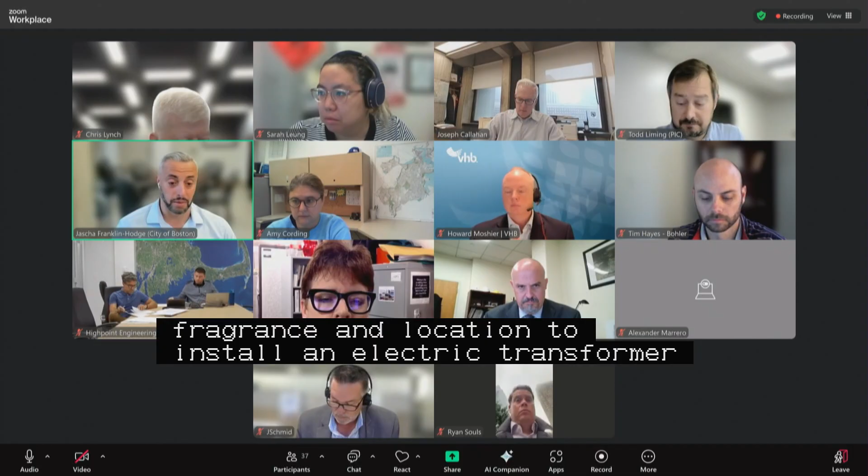On to our next agenda item, public hearing continued number 1 on a petition by NStar Electric Company, DBA Eversource Energy, for a granted location to install an electric transformer vault and associated infrastructure within Whitby Street, Public Way, East Boston, located at address number 16, generally northwest of Ford Street. It was new business on August 14th and had public hearings on August 28th and September 11th, as shown on a plan entitled City of Boston Public Works Department Engineering Division Granted Location Plan of Transformer MH4PIC, 16 Whitby Street, East Boston, one sheet dated August 2025. The proponents please introduce themselves, their affiliations, and let us know how you intend to proceed today.

Hi, good morning. It's Katie Flaherty from Eversource Electric. Just wanted to give you an update. We're still talking between Chong and our legal department on the documents that you had requested, and the Mylar plans that we have to submit still do need some additional corrections. So we are going to ask this morning for another continuance, but we are actively working on the documents that you are asking us to submit.

All right, well, appreciate that work. Katie, is 2 weeks appropriate? Yes, it would be. Okay. Do I hear a motion to continue public hearing continued number 1 until October 9th? I'll make a motion to continue public hearing continued item number 1, as read into the record by the chair, till October 9th. Second. All in favor? Aye. Aye. Aye. Any opposed or abstain? So moved. We'll see you back here then. Thank you. Thank you very much.

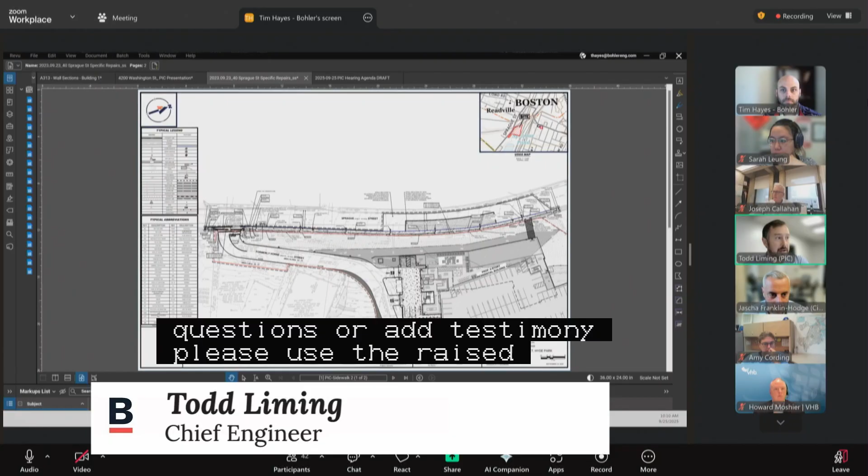Hearing none. PIC staff or members of the public? I will take this opportunity to remind the public, if you wish to ask questions or add testimony, please use the raised hand function, which can be found at the reactions tab at the bottom of your screen. I do not have any comments at this time, and I'm not seeing any raised hands, so I think we're all set.

Do I hear a motion to approve public hearing continued number 2? I'll make a motion to approve a petition by LHCD Sprague Owner LLC for the making of specific repairs within Sprague Street as read into the record by the chair. Second. All in favor? Aye. Aye. Any opposed or abstain? So moved. Thank you so much.

All right, on to the public hearing section of our agenda, starting with public hearing number 1 on a joint petition by GUGV2 212 Stuart Property Owning LLC and the Boston Redevelopment Authority, DBA, the City of Boston Planning Department, for the discontinuance of any and all rights to travel the public may have had within segments of Stuart Street, Public Way, Boston proper, located on its southerly side at address number 212 east of Church Street. This was new business on August 14th, as shown on a plan entitled City of Boston Public Works Department Engineering Division Discontinuance Plan, Stuart Street, 212 Stuart Street, Boston proper, one sheet dated July 9th, 2025, revised August 29th, 2025. Would the proponents please introduce themselves, their affiliations, and give us any updates since your new business hearing?

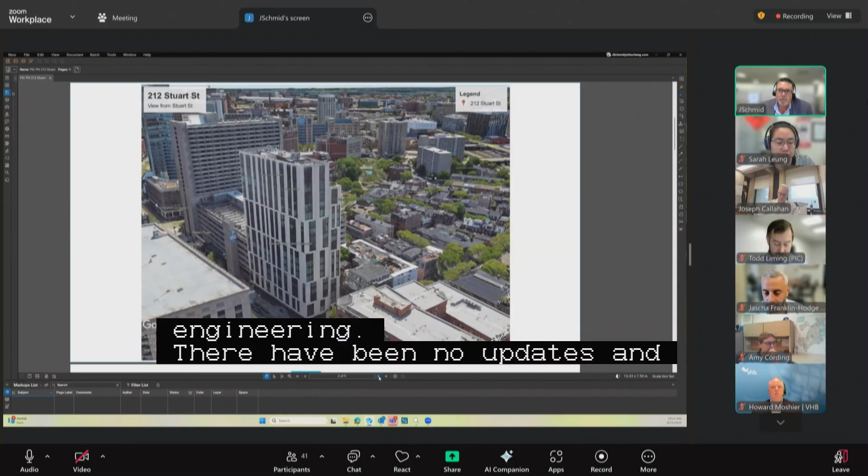Good morning, this is John Schmid with Nitsch Engineering. There have been no updates since new business. This is really a housekeeping exercise. This project was permitted through the Public Improvement Commission in 2019 and constructed with completion in 2022. Post-construction surveys had identified a couple areas that the building had grown outside of the discontinuances and takings that were approved back in 2019. So there has been an appraisal report that's been submitted and accepted by the city.

And these discontinuances have upset limits, basically from the sidewalk to the limit that is required. The application, the one before you, the discontinuance would start at the sidewalk and extend about 42 feet up, which is about 4 stories. The total square footage is about 43 square feet, and it runs along the front of the building here. At new business, there was a question about the clearances of the sidewalks, and the clearance on the sidewalks is still in excess of 8 feet. And I had reviewed this with Sarah post the new business hearing. I'm open to any questions.

Commissioners. Hearing none, PIC staff or members of the public? John, could you just, for the record, mention the difference between this action and the next action as far as the fee interest in the right-of-way? I'll defer to Gregory on that because I'm not totally clear on those differences between the two actions.

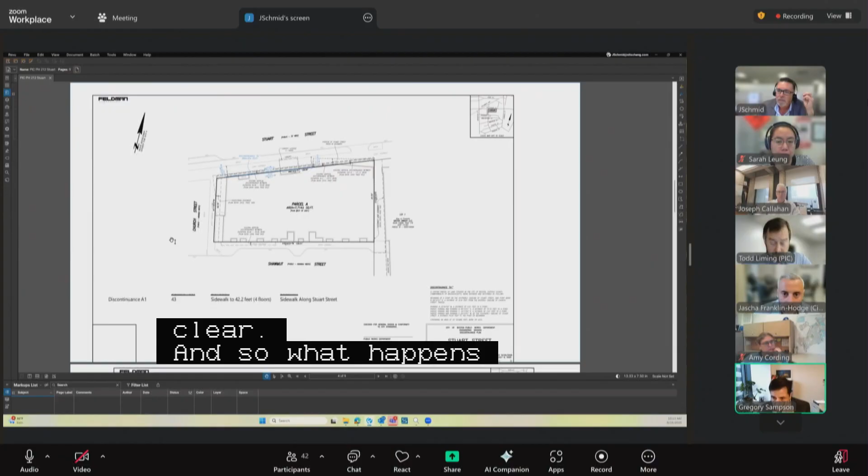Good morning, Greg Sampson with Sullivan & Worcester. There was a portion of the Stuart Street where the fee interest was with the City of Boston. The Boston Planning Department approved the taking for that interest last week. So public hearing 1 addresses the portion of the discontinuance that was subject to the taking. We'll talk, public hearing 2 will address the remaining portion as well as a portion of discontinuance on Shawmut Street. Perfect. Thank you, Greg. Thank you.

All right, hearing no other comments or questions, do I hear a motion to approve public hearing number 1? Make a motion to approve a joint petition by GUGV2 212 Stuart Property Owner LLC and the Boston Redevelopment Authority, DBA, the City of Boston Planning Department for a discontinuance in Stuart Street as read into the record by the chair. Second. All in favor? Aye. Aye. Any opposed or abstain? So moved.

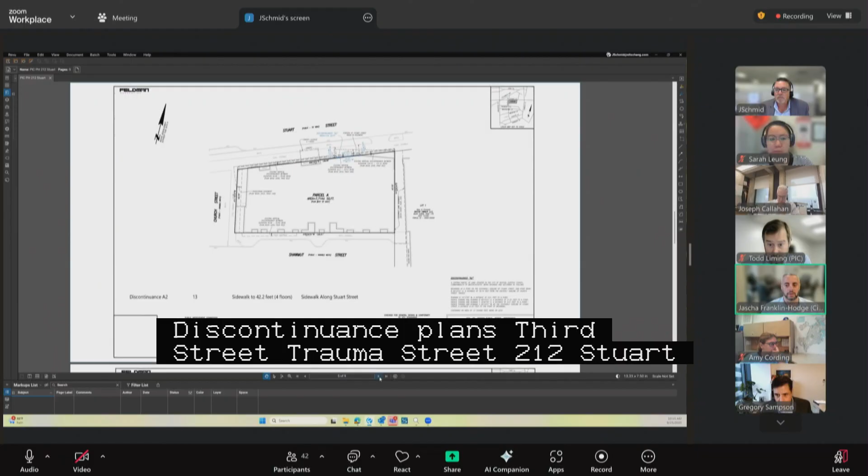On to public hearing number 2 on a set of petitions by GUGV2 212 Stuart Property Owning LLC for the discontinuance of any and all rights to travel the public may have had within segments of the following public ways in Boston proper: Stuart Street on its southerly side at address number 212, generally east of Church Street; Shawmut Street on its northerly side, generally between Church Street and Coconut Grove Lane. New business on August 14th, as shown on a set of plans entitled City of Boston Public Works Department Engineering Division Discontinuance Plan, Stuart Street, Shawmut Street, 212 Stuart Street, Boston proper, 2 sheets dated July 9th, 2025, revised August 29th, 2025. The proponents please reintroduce themselves and their affiliations and let us know if there have been any changes to these plans since your new business hearing.

Good morning, John Schmid with Nitsch Engineering. There have been no changes since new business. This is the section along Stuart Street that's about 21 feet long, consists of 13 square feet, and it's only about 4 stories high, and that's the upset limit for the discontinuance. And we're maintaining the appropriate sidewalk that's greater than 8 feet. All right.

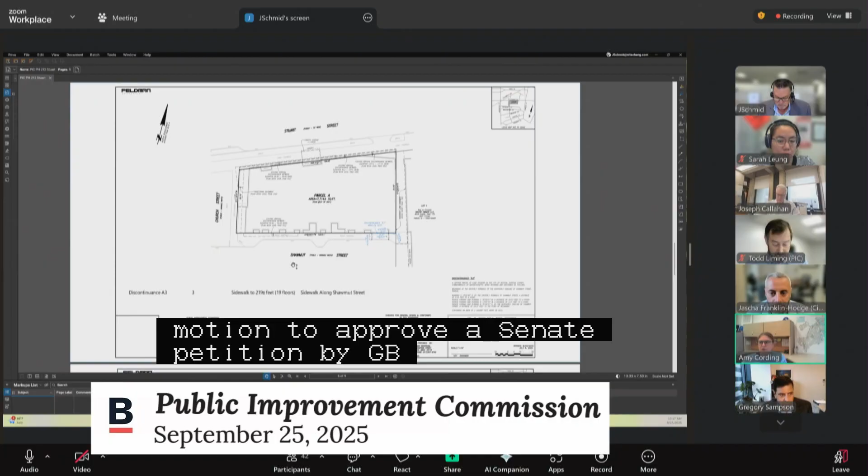Do I hear a motion to approve public hearing number 2? I'll make a motion to approve a set of petitions by GUGV2 212 Stuart Property Owner LLC for discontinuance in Stuart Street and Shawmut Street as read in the record by the chair. Second. All in favor? Aye. Any opposed or abstain?

So moved. On to our third item, public hearing number 3, on a set of petitions by GUGV2 212 Stuart Property Owning LLC for the granting of projection licenses for the installation of balcony railings and a canopy over portions of the sidewalks within the following public ways in Boston proper: Stuart Street on its southerly side at address number 212, generally east of Church Street; Shawmut Street on its northerly side, generally between Church Street and Coconut Grove Lane. This was new business on August 14th, as shown on 2 plans entitled City of Boston Public Works Department Engineering Division Railing License Plan, Shawmut Street, 212 Stuart Street, Boston proper, 1 sheet dated July 9th, 2025, revised August 29th, 2025, as well as City of Boston Public Works Department Engineering Division Canopy License, Stuart Street, 212 Stuart Street, Public Way, Boston, 1 sheet dated July 9th, 2025.

Would the proponents please reintroduce themselves, their affiliations, and let us know if there have been any changes since your new business hearing. Good morning, John Schmid with Nitsch Engineering. There have been no changes since new business. This is a series of 8 locations along Shawmut Street where the architectural railings project further into the public way than was intended. The projection is 2.4 inches into the public way, and they're all identified on this drawing.

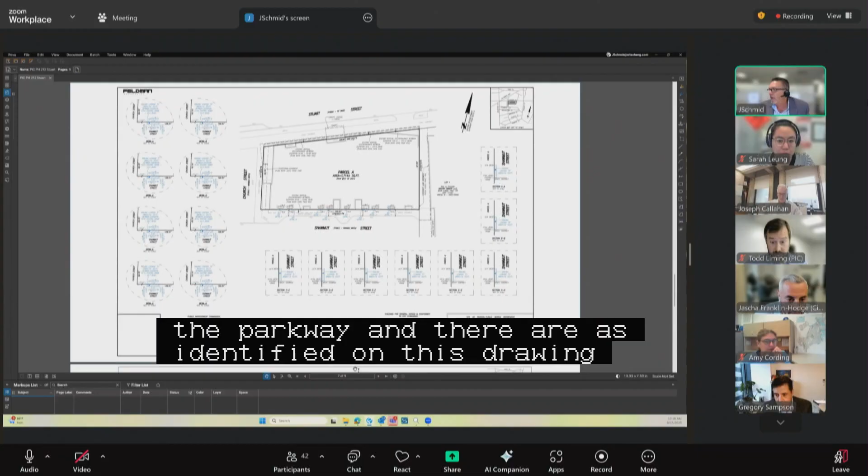Commissioners, and then the second component? Second page, yep. Second component has to do with the canopy on Stuart Street, which in 2019 was permitted with the commission for 134 square feet. It was constructed at 150 square feet, so we're coming in to just confirm that this is acceptable. We have 13.1 feet of clearance at the building, and it's 14.7 feet of clearance further out at the limit of this projection.

Any questions, Commissioners? PIC staff or members of the public? All set on these. All right. Do I hear a motion to approve public hearing number 3?

I'll make a motion to approve a set of petitions by GUGV2 212 Stuart Property Owning LLC for the granting of projection license in Stuart Street and Shawmut Street as written in the record by the chair. Second. All in favor? Aye. Any opposed? Thank you very much. Abstained? So moved. You are all set.

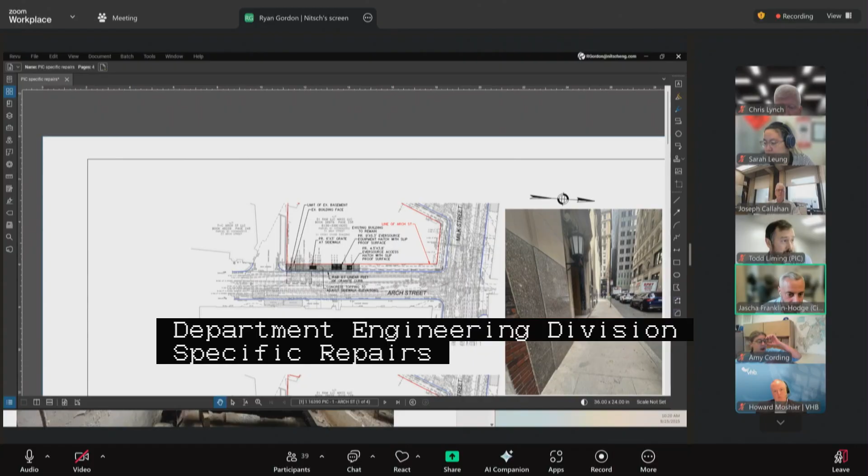Would the proponents please introduce themselves, their affiliations, and give us an update on the topics discussed at your new business hearing. Good morning, Mr. Chair and members of the commission. My name is Scott Oran, I'm manager of Dinosaur Milk LLC. I'm also treasurer of the 31 Milk Street Condominium Association, which is the licensee under an areaway agreement dated October 31st, 2012. I have Ryan Gordon from Nitsch Engineering here to explain what's been changed since we last saw you. Go ahead, Ryan. Good morning, Ryan Gordon, Nitsch Engineering.

Since the new business hearing, we have had an update to the extent of the sidewalk repairs along Arch Street, where we previously had about 97 feet. The locations of the Eversource hatches, we have an equipment hatch, a personnel hatch, and a grate in the sidewalk. Those have shifted south along Arch Street, so that's reduced the length to about 67 feet.

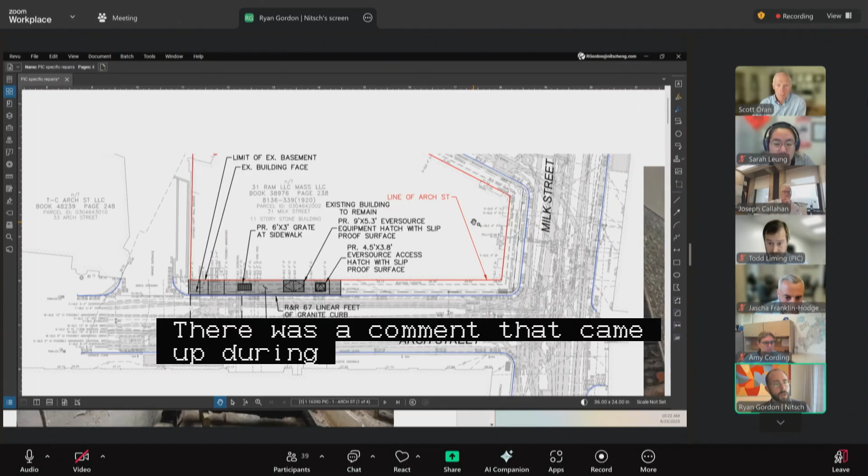And then along with that, there was a comment that came up during new business asking about the accessibility for the existing crossings on Milk Street at the intersections of Arch Street and Hawley Street.

At the intersection of Hawley Street and Milk Street, there appears to be a 2-inch lip on the curb that is not a great condition for pedestrians crossing the street. So as part of that, we would be looking to add an asphalt patch in front of this area to reduce that lip, which seems like something we can easily do to improve that accessibility onto the sidewalk.

There was also a comment about the structural integrity of the areaways around the building, because they do surround the building on Hawley, Milk, and Arch Street. Since then, cores have been performed for the slab of the areaway that have shown it's in good condition. There's an existing areaway agreement in place from 2012 that requires the owner to maintain the areaways in good condition, and those cores show that's the case, and they'll continue to do that as this project progresses.

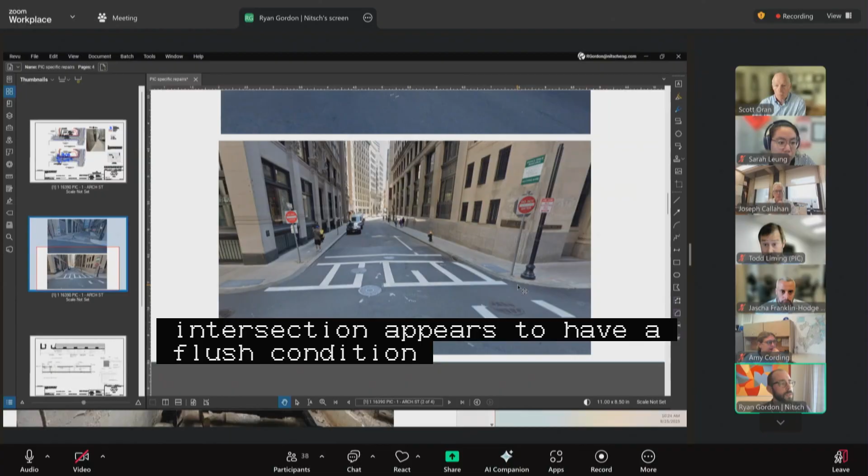And one other area on the other side, at Milk Street and Arch Street, this area at this intersection was recently repaved as part of the Milk Street bike lane project, and this crossing appears to have a flush condition. So that's something we've taken a look at to make sure that if there was any opportunity to improve accessibility, there does appear to be a flush condition already. Overall, the proponent is willing to work with the city to address any accessibility upgrades considered for the future here, and we're happy to answer any questions.

Great, thank you very much for those updates. On the accessibility front, I appreciate the additional analysis done on the existing areaway and the commitment to make changes to improve accessibility here, understanding that they will not result in fully ADA compliant ramps and sidewalks, but that there are things that can be done to make this a more traversable area for people who have mobility aids or otherwise can't navigate the existing conditions safely.

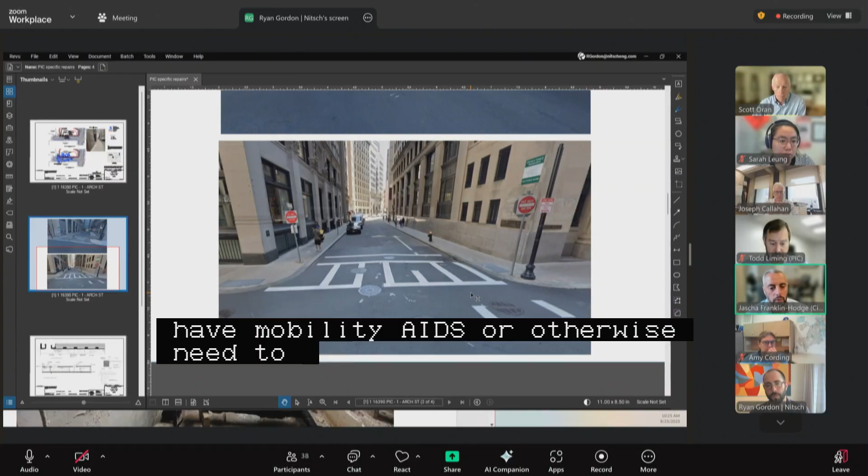With the areaway, at some point the city will need to come through to bring these intersections into full ADA compliance and construct proper ADA compliant ramps to the best of our ability. At that time, we will need both—at this point that's not scheduled work, but at that time we will need to likely reaffirm that the areaways are still structurally stable, if that is several years out from now.

And also we'll need some support from the building during the construction process to make sure that any work we are doing does not interfere with the stability of the areaways, and if there's waterproofing or other elements that might be disrupted by our construction, we'll need that sort of engineering level coordination. So I understand there is an existing license for the areaways, which likely obligates some of this cooperation, but I am hoping that the proponents for this project, understanding there's a condo relationship here, can affirm their intention to be supportive participants in any future reconstruction work, to the extent that you are, as a legal entity, still engaged in this project. We can, yes. Okay, all right, I appreciate that.

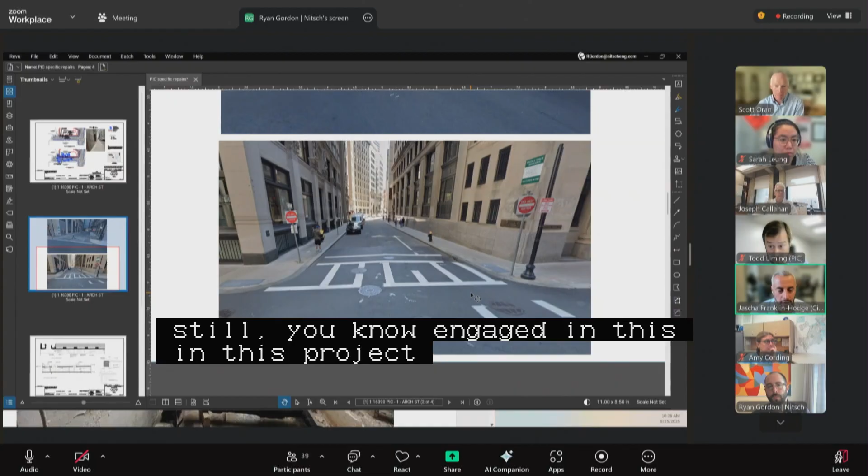And then in terms of the shorter term, smaller, not ADA, but still improved changes you are proposing to make, my request is that you sit with the Disabilities Commission to affirm that those changes are in fact what they would recommend, short of producing a fully compliant ramp here, and to see if there are any other similarly low construction or construction-light approaches that could be added here. One of the things we've used in a few places in the city are adhesive tactiles that attach to an existing surface but provide some detectability for people with visual impairments who are navigating the sidewalk. So there may be some other similar things like that, and even just looking at the intended asphalt treatment, we want to get their input on that. So we'd like to have that commitment from you to work with them on any of those smaller term improvements that are outside the scope of what the PIC is formally reviewing today.

Sure, absolutely. All right, appreciate that. Commissioners, other questions, comments?

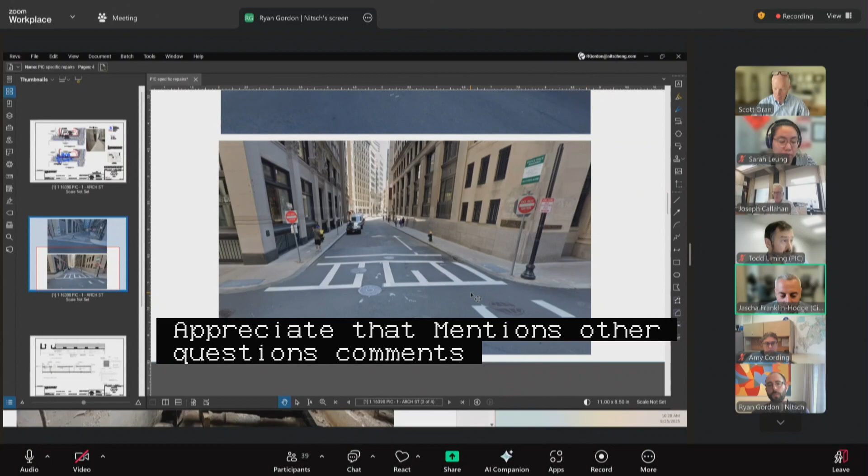Hearing none from PIC staff or members of the public, the chair confirms everyone is set on this item.

A motion was made to approve the petition by Dinosaur Milk LLC for specific repairs within Arch Street, contingent upon acceptance of revisions by the Commission for Persons with Disabilities. The motion was seconded, all were in favor, none opposed or abstained, and it was so moved.

The final public hearing concerns a petition by Verizon New England Incorporated for a grant of location with lead company status and no participants, to install new telecommunication infrastructure with city shadow conduit in Dorchester: Bird Street between Columbia Road and Cedar Place/Monadnock Street, Columbia Road at Bird Street, and Cedar Place west of Bird Street/Monadnock Street. This was new business on September 11th, shown on a plan entitled City of Boston Public Works Department Engineering Division Grant of Location Plan, Verizon, Bird Street at Columbia Road, proposed conduit installation, one sheet dated September 2025.

The proponents were asked to introduce themselves and provide updates since the new business hearing. Alexander Leslie Marrero introduced himself, noting he works with Pike Telecom, an authorized Verizon contractor, presenting the petition. He stated there have been no changes since the petition was brought as new business before the commission.

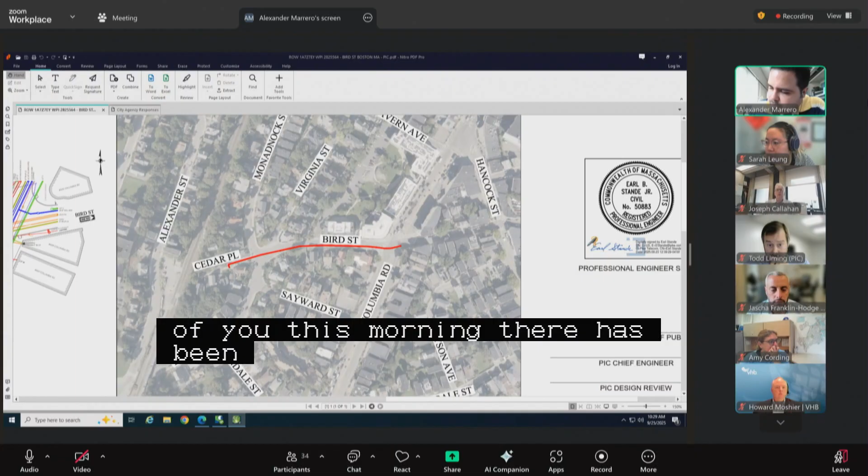As a recap, Verizon is petitioning to place one new 4-inch conduit and one new 4-inch city shadow duct from existing manhole number 11/280 at the intersection of Columbia Road and Bird Street, running westerly down Bird Street toward Cedar Place and onto Cedar Place, terminating at pole 849/1. This is to provide service to a small cell site located on Cedar Place.

The chair thanked the presenter and asked commissioners if they had any questions. Hearing none, the chair asked PIC staff or members of the public, who confirmed all set.

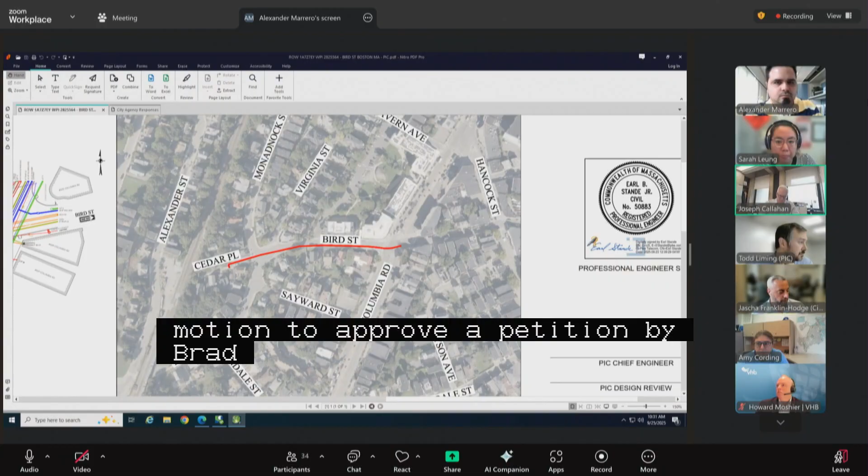A motion was made to approve the petition by Verizon New England, Inc. for a grant of location in Bird Street, Columbia Road, and Cedar Place, as read into the record by the chair. The motion was seconded, all were in favor, none opposed or abstained, and it was so moved.

This concludes the public hearing section of the agenda, moving to new business, starting with item 1: Pilgrim Road at 334 Riverway, 415 to 435 and 440 Brookline Avenue, Joslin Place, Roxbury pedestrian easement, specific repairs, and vertical discontinuances on a set of joint petitions by Beth Israel Deaconess Medical Center Incorporated, Dana-Farber Cancer Institute Incorporated, and Joslin Diabetes Center Incorporated.

The proponents were asked to introduce themselves and walk through the project. Howard Moshier of VHB in Boston, Director of Land Engineering, introduced himself along with Jarrod Dore, Vice President at Beth Israel Lahey Health, and Michael Hinchcliffe, Principal at Payette, Architect of Record. They presented an overview of the Future Cancer Hospital project and the proposed actions they are seeking approval for in a subsequent public hearing, then turned it over to Jarrod Dore.

Jarrod Dore, Vice President of Capital Facilities and Engineering for BILH, thanked the commissioners and provided background on the project: a bold vision for the future of cancer care in the area. In fall 2023, Dana-Farber Cancer Institute and Beth Israel Deaconess Medical Center forged a new collaboration to advance adult cancer care, announcing plans to build the region's only freestanding cancer hospital. The collaboration aims to improve access and transform patient care as cancer incidence increases and care models rapidly evolve.

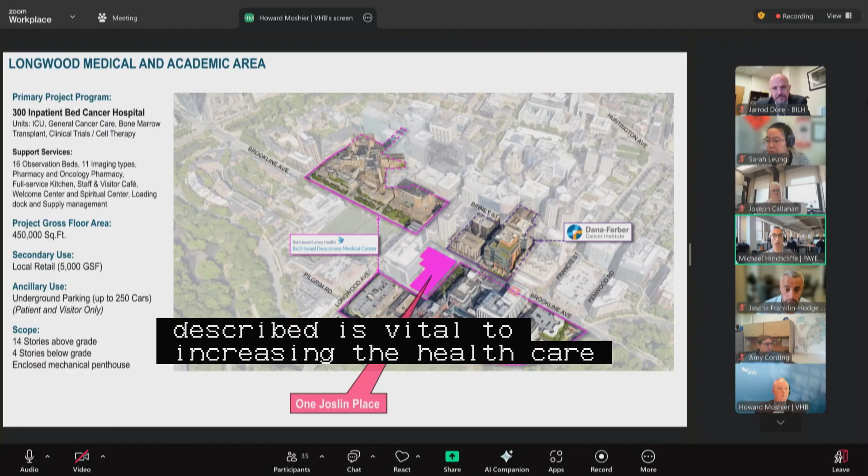As noticed in 2023, the project was introduced through a joint update of the institutional master plans for both institutions, reviewed and approved by the Boston Planning and Development Agency. In June of this year, the project that was the outcome of both of those institutional master plans was also approved. That is a 300-bed hospital dedicated exclusively to cancer care.

In this aerial view here, you see the context. It's at a location currently housing the Joslin Diabetes Center between both campuses, the Beth Israel Deaconess Medical Center East and West campuses in the Longwood Medical and Academic Area, and the Dana-Farber Cancer Institute campus just adjacent across Brookline Avenue. The project will house 300 beds operated and licensed by Dana-Farber Cancer Institute, dedicated exclusively to cancer care.

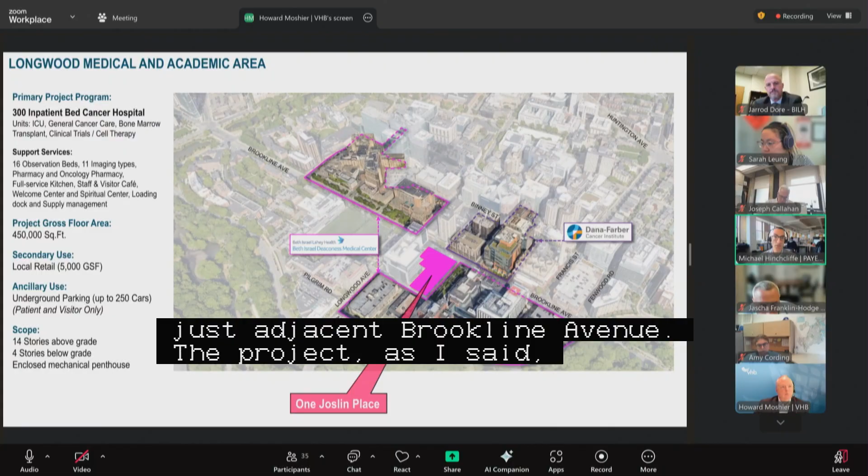The building will also house additional departments and functions that will support this freestanding cancer hospital, including patient amenities, kitchens, support areas, diagnostic imaging and treatment spaces, as well as an underground parking facility serving patients and their visitors. The building will be 450,000 square feet with approximately 14 stories above grade and 4 stories below grade for that valet parking garage.

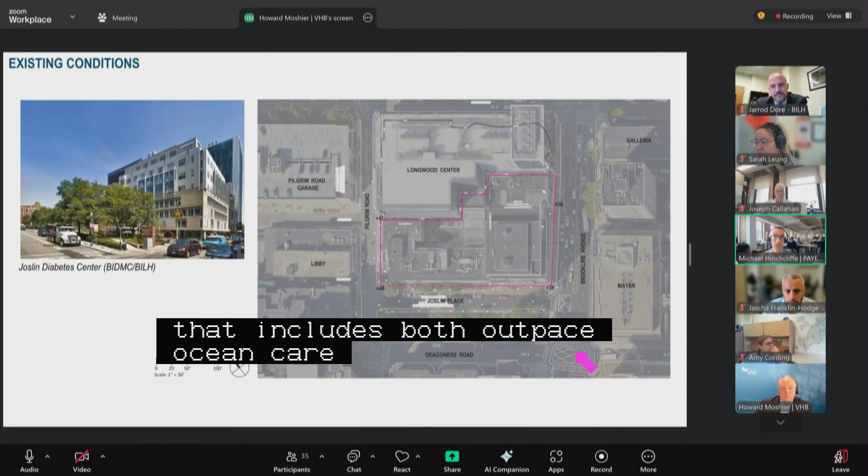On this image, you see in the upper left-hand corner the existing Joslin Diabetes Center that includes both outpatient care as well as research. Now a part of the BILH system, those functions are currently being relocated or have been relocated to other locations on the BIDMC campuses.

The footprint of the existing building will be almost replicated by the footprint of the new cancer hospital, including generous setbacks along Brookline Avenue and Joslin Place for increased pedestrian realm and easements.

The proposed building that we see in the next image will really seek to include the vision of cancer care and patient-centered cancer care that is at the heart of Dana-Farber Cancer Institute, as well as their partnership with BIDMC.

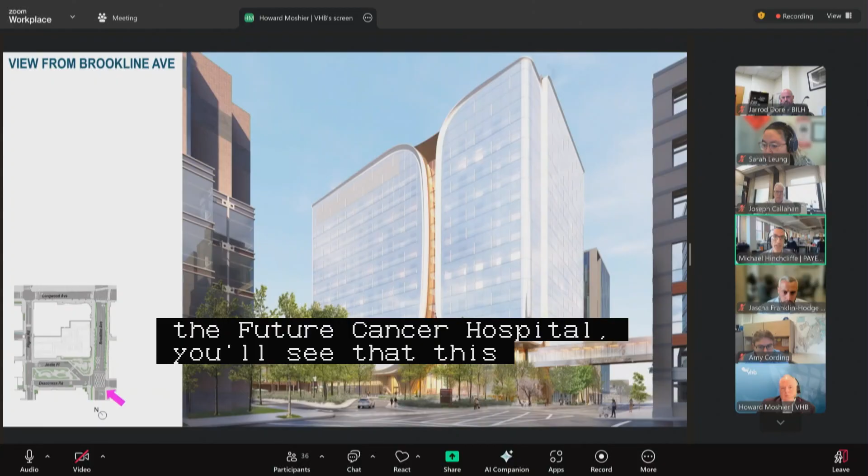This view is taken at the corner of Brookline Avenue and Deaconess Road, looking to the northwest at the future cancer hospital. You'll see that this bold and striking vision of cancer care is uplifting and a clear and direct benefit to the urban realm, as clearly noted by the BPDA and through its public approvals process.

I'll now describe to you a few of the features that we'll be returning to discuss with you in detail around the vertical discontinuances. You'll note at the ground plane that there is a proposed reconfiguration of Joslin Place and Joslin Park at the request of the city for increased pedestrian safety and vehicular circulation.

That is a part of the proposed design that we'll return to you that will require additional legislative approvals that the various city agencies are working toward.

But in this view, we see that the main entrance is directly in front of us on the reconfigured Joslin Place, with a new canopy to protect vehicular movement from patients and their visitors into and out of the hospital, as required by the health code.

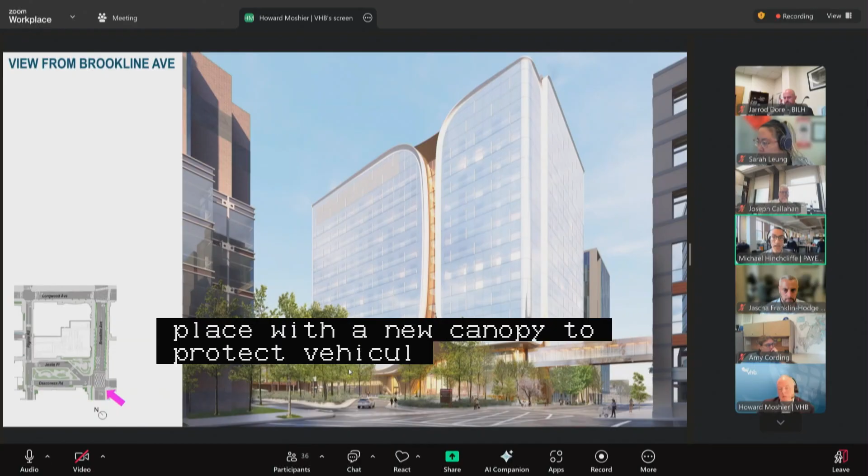To the right of the image, we see a proposed hospital connector spanning across Brookline Avenue to connect the outpatient functions and other support functions of the Dana-Farber Cancer Institute campus across to the future cancer hospital. You'll note that there are various architectural trims and appurtenances that are a part of the architectural expression of the building that do as well cross the property line, which we will describe in detail.

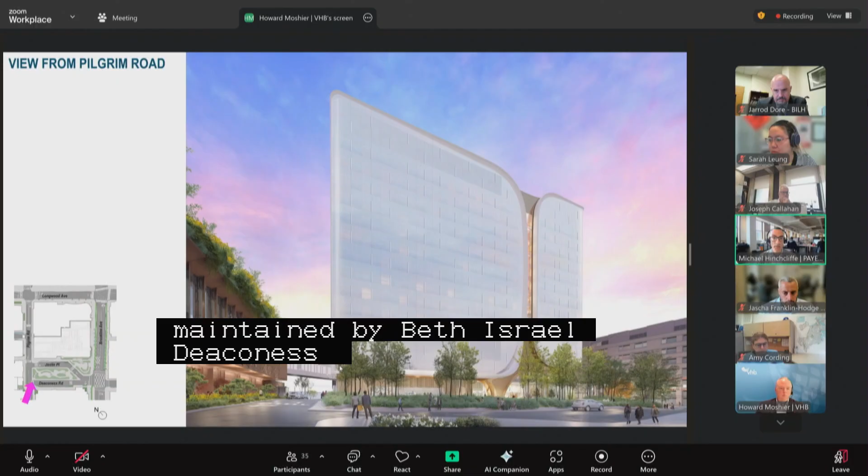On the left-hand side of the image, you see a second hospital connector that will link the future cancer hospital with the various and critical support departments located within the Beth Israel Deaconess West campus. This new connector will run along Pilgrim Road over the sidewalk, as well as spanning across Pilgrim Road at an elevated location to connect the two buildings together.

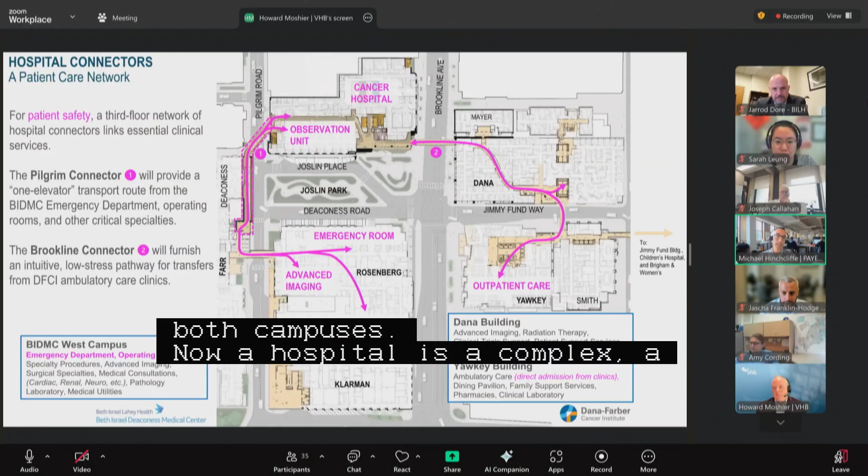Let me tell you a little bit more about those key hospital connectors. These were discussed and reviewed at length and in great detail with members of the Boston Civic Design Commission and with BPDA staff for their essential nature and key design in the public realm, to link the future cancer hospital with both campuses. A hospital is a complex ecosystem of patient care that requires links to many ancillary departments. While the majority of the functions of the new cancer hospital will be located within the building, the key links to the two campuses will provide absolutely essential care and patient safety.

The first connection that will cross the public way is the Pilgrim Road connector. It will span across Pilgrim Road and connect the inpatient hospital, its diagnostic and treatment units, and a key observation unit used as a transition from admission into the emergency room to an inpatient bed, which is one of the main ways that, unfortunately, cancer patients arrive at a hospital through that emergency room visit. That emergency room will be part of the Beth Israel Deaconess West campus. This elevated connector will provide a critical link for patients to those advanced imaging modalities, operating rooms, and emergency rooms on the West campus, spanning across Pilgrim Road.

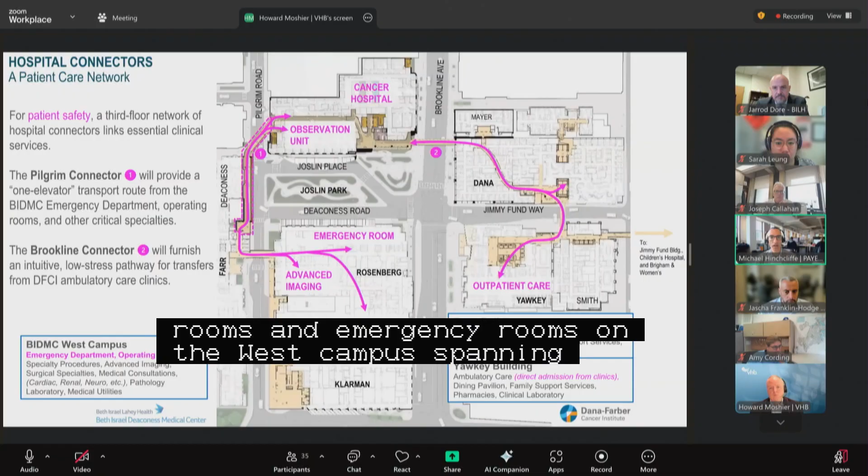The second connector is across Brookline Avenue. That will link key outpatient functions that exist today on the Dana-Farber Cancer Institute campus. Again, unfortunately, many cancer patients in the course of a visit to their doctor will be admitted directly into inpatient care. The connector across Brookline Avenue at the third floor links to a series of existing hospital connectors that link their campus, allowing for a seamless, low-stress, and safe transport of patients from those outpatient visits directly into either the observation unit or, unfortunately, to the hospital beds themselves. This key link of hospital connectors has been carefully considered with patient safety at its base need.

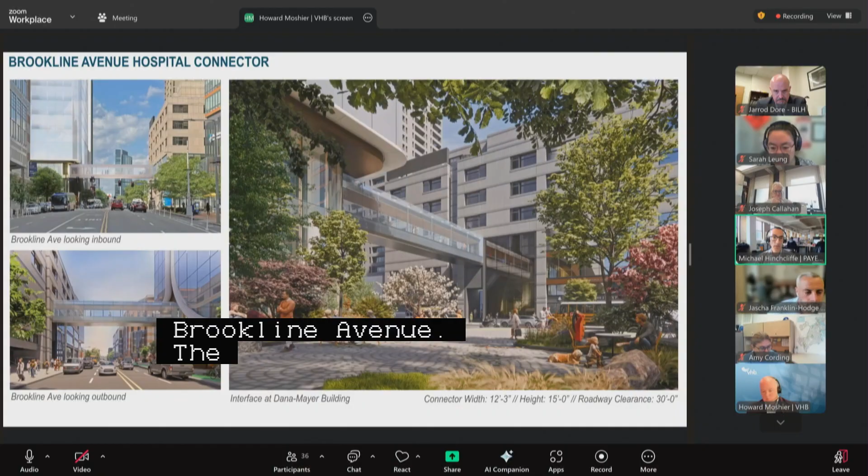Here in these views, we see the proposed connector across Brookline Avenue. The largest view on your right is taken from the proposed reconfiguration of Joslin Park. You see that this connector is designed to be quite high above the roadway, providing unimpeded views below it, both inbound and outbound on Brookline Avenue, a key thoroughfare in the city, as well as a transparent and light-filled experience that eases wayfinding and patient movement across from the Dana-Farber campus into the new future cancer hospital.

You may notice on the image on the left in the lower corner, there are additional canopies and setbacks at grade that provide for that widened pedestrian realm and additional traffic and transportation improvements that are part of the proposed project.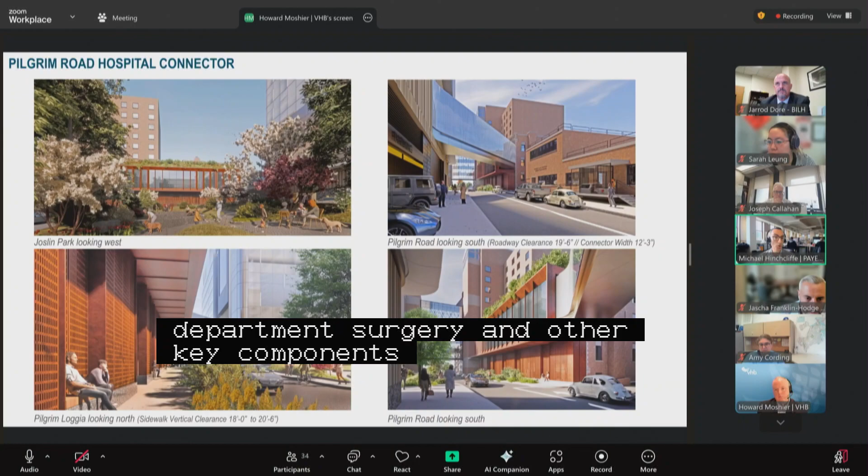This connector is in two parts. The first part in the upper right is a connector that is elevated over Pilgrim Road. You'll notice in that image below that this is also the proposed location of two new curb cuts, one serving the building's loading dock, and a second serving the valet parking garage dedicated to patients and their visitors.

The other three images on this slide show the secondary part of the connector. This part is elevated above the public way, does not cross over the curb line, and provides, again, that patient link at the third floor to the West Campus for patient movement. Within the public realm, though, this does propose several distinct improvements, including covered seating and a visual extension of Joslin Park that enhances pedestrian safety and movement along Pilgrim Road for the public benefit.

We look very forward to describing the project in its detail to you in future meetings. I'll turn this back over to Howard to describe some of the more specific vertical discontinuances that are part of the project. Thank you. Thank you, Michael.

Thank you, Jarrod. It's hard to follow beautiful architectural renderings with blue and black and white engineering drawings, but Michael did an excellent job of describing the vertical connectors and the elements that do project over the property line. So today, we're presenting three proposed actions, vertical discontinuances.

As a result of the vertical discontinuance on Pilgrim Road, we're going to describe a proposed specific repair and accordingly a pedestrian easement, working from right to left.

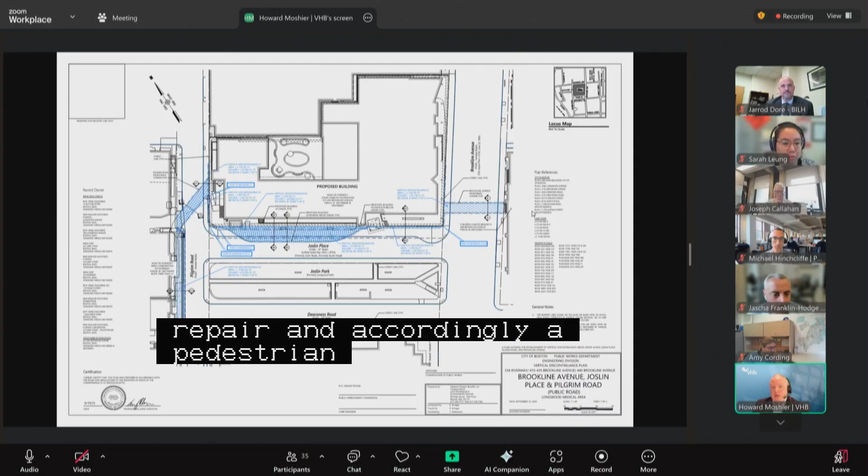Michael described the pedestrian connector that will extend over Brookline Avenue. That's in this location, right here, connecting the new building to the existing Dana-Farber campus.

Along Brookline Avenue, there's a series of minor projections. The projects work tirelessly with a lot of city departments to create a beautiful proposed building. There are some architectural elements that have minor projections, similar to what you heard earlier on a different public hearing, for which we're seeking discontinuance as we wrap around.

The large discontinuance you see on Joslin Place is not just an architectural expression, it's a required canopy at a hospital so that patients can get out of a car under cover.

On this plan, we are reflecting the existing Joslin Place right-of-ways and highway easements. As Michael described, we are proposing and working with a number of city and state departments on the reconfiguration of this intersection. We plan on presenting that to the commission once all the consensus has been achieved and we have a clear plan to present, but that will come forth in a future action.

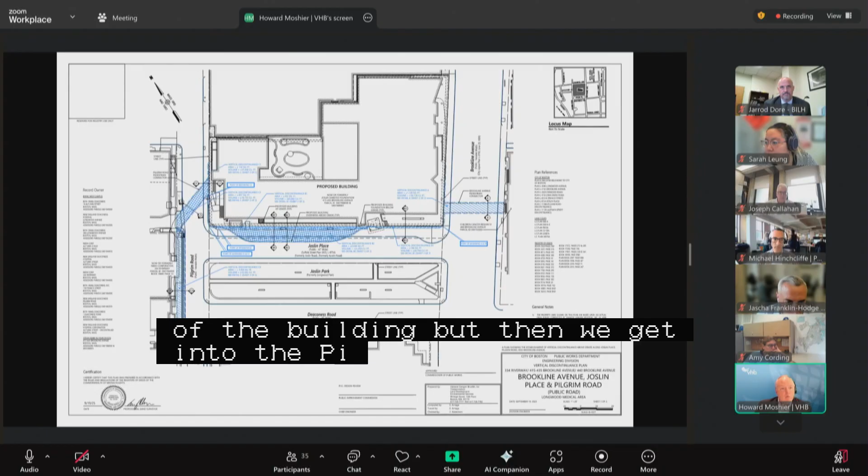Moving again to the left, we do have some minor discontinuances with the architectural elements of the building, but then we get into the Pilgrim Road connector where it crossed diagonally as shown in Michael's renderings. And then we proceed south to where it connects to an existing system of buildings.

It's along this stretch of Pilgrim Road where, due to the width of the connector, it would have projected over the roadbed. We were requested through various departments to modify the curb line so that the bridge was fully behind the curb line. I'll describe that in the vertical and the specific repairs a bit later.

So the second and third sheets of the discontinuance plan describe all the myriad of various discontinuance areas. We've worked closely with Todd and PIC staff to nail these down and get the sections described quickly. But most of the clearances are 18 foot plus.

There's one area on the Pilgrim Road connector, which I was just describing, where the minimum clearance is 16 feet. Otherwise, it grows as the topography falls away from that one high point.

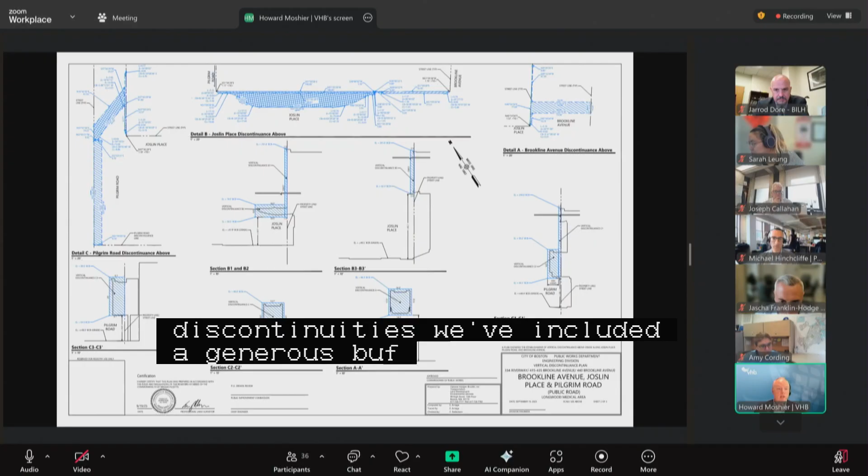In each of these discontinuances, we've included a generous buffer on the plan view as well as vertically above the elements, with the exception of this one on Pilgrim Road where we need to adhere to the 16 feet minimum, which provides less tolerance for the design and construction team, and they are aware of that. We've acknowledged it through various departments.

Legal descriptions. And then on the specific repair, we are proposing to bump the curb line out. The road is sufficiently wide, so we create the street side, curbside planters, and move the sidewalk behind the furnishing and planting zone. As you see here in a slight red strip, that would have pushed the sidewalk to less than the city's desired minimum width in this area.

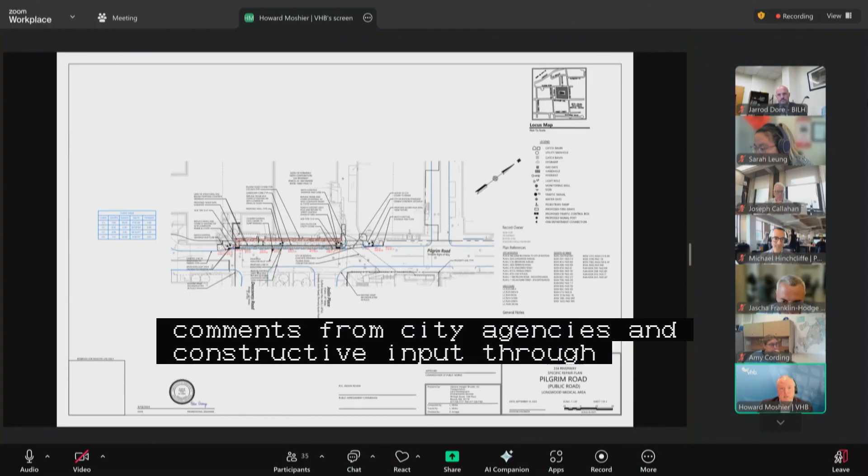So we are proposing in the red area a pedestrian easement. The project's been circulated and noticed, and we've received a lot of great comments from city agencies and constructive input for which we've responded. We're happy to be here today. There's the details and the pedestrian easement. So thank you for the time.

That concludes our presentation portion. We're happy to entertain questions. And for those interested, we also have other members of the design and construction team if we need to go into that area.

Thank you all very much. Really appreciate the thorough presentation and all of the context behind these proposed actions. It is very helpful for us. Commissioners, questions, comments?

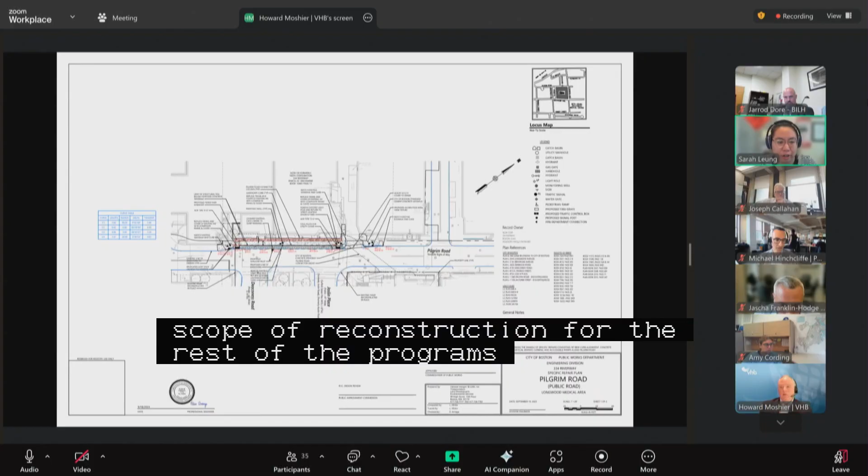I'd like to thank the team for the wonderful presentation. I did have a question on the reciprocal ramps on Pilgrim Road. I think it's one page up from this, or two pages? Yes, this one. Just wanting to understand the scope of reconstruction for the reciprocal ramps that are planned as part of this project or other projects, and just clarifying the sequence of construction for these ramps.

Thank you, Commissioner, that's a great question. On this plan, we have only addressed the specific repairs on the west side of Pilgrim Road. We have noted that in the absence of any further approvals, which we will be seeking, these would be reconstructed to be accessible in place at these corners.

However, we will be proposing, after consensus is built, a series of specific repairs on the eastern side of Pilgrim, going down through Joslin Place and Deaconess Road, up and down Brookline Avenue, that will address any proposed changes to ramps.

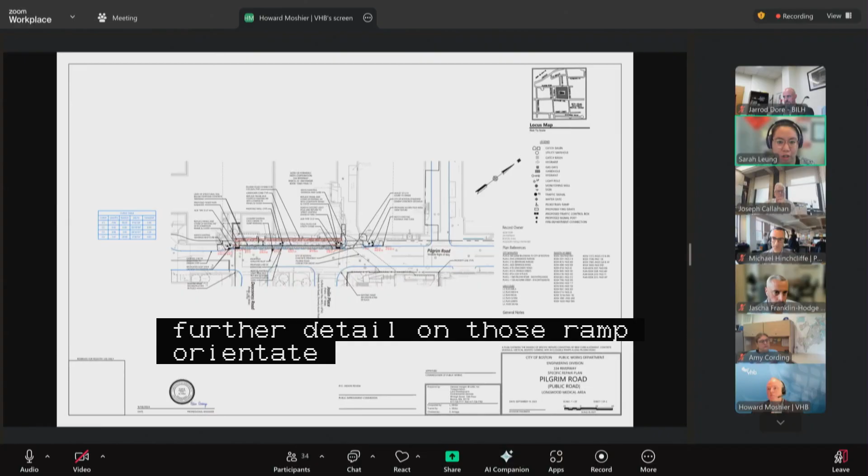So for the purpose of this approval, we're just saying we will reconstruct in place. As further details develop around the urban realm improvements, we'll provide further detail on those ramp orientations. Okay, so they'll be part of future petitions, namely the ramps at the park. Yes, that is correct.

Is there any estimate you've done on increase in percentage of vehicle traffic when this project is complete? Oh my gosh, there were thorough traffic studies done as part of the Article 80 process, Mr. Callahan. Fully studied with BTD and the planning group at BPDA as well. You know, given the criticality on cancer treatment, and there's already a lot of care given in the area, it's very hard.

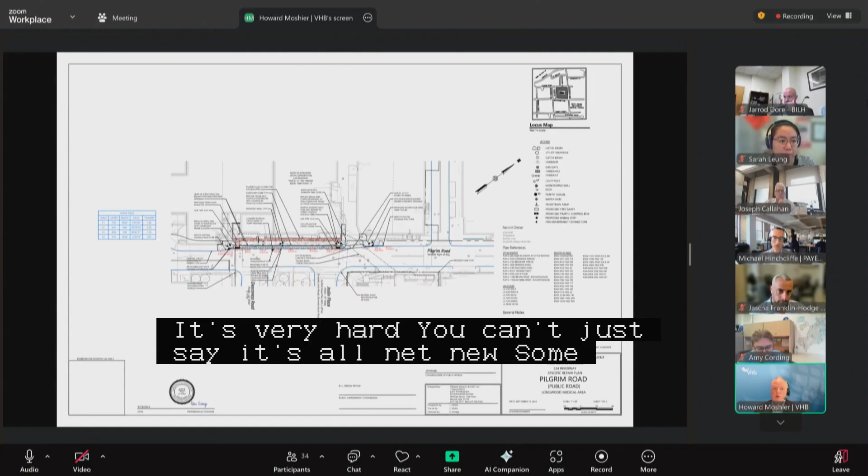You can't just say it's all net new. Some of the care is already being given, it's just in under capacity facilities. So we've undergone a thorough review with the city on that, and if you wanted to, we could share some links to those studies.

Mr. Callahan, it's worth noting that as part of the traffic studies and agreed off-site mitigations as part of the hospital approval, Pilgrim Road, a public way to the south of Deaconess Road to Francis Street, currently restricted to ambulance traffic to serve the emergency department, will be opened to two-way traffic to ease congestion and improve accessibility and movement through the district as an outcome of those traffic studies and reviews with the various city agencies.

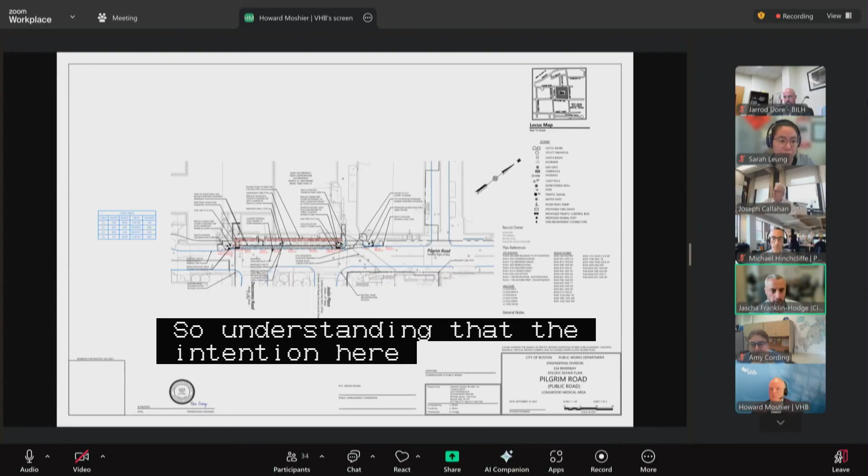That would be great, we can certainly amend that note. That is the intention as conveyed on the plan and was included at the request of one of the departments, so we're happy to amend that note to reflect that is certainly the intention.

And I'm going to be very excited to present the next round of actions that show all the improvements the proponents will be making in this area. It's going to be transformative. Yeah, no, you can tell from the renderings that a lot of thought and work has gone into what that will look like, and we're looking forward to that getting settled.

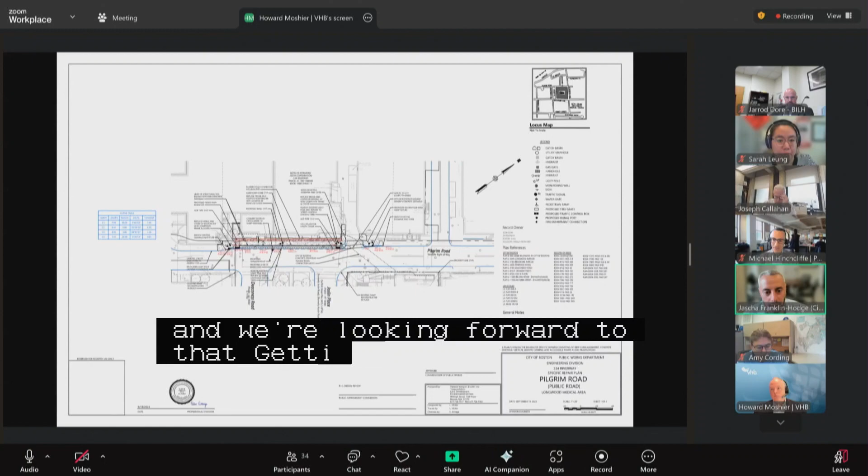Can I ask in that vein though, why the proponents have chosen to come to us with this particular set of actions now? Is there an intention to start work on Pilgrim Road prior to the completion of the rest of the project plans, or why are we reviewing this in pieces? That's a fair and excellent question.

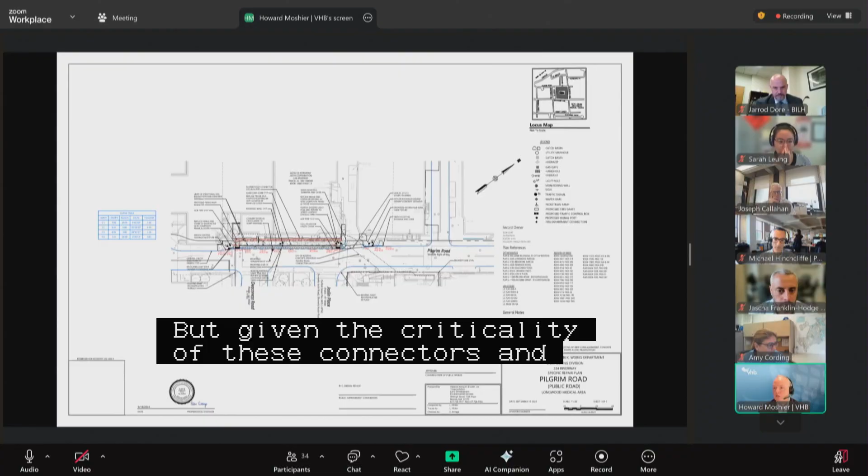As Michael Hinchcliffe had described, the connectors are so integral to the success and outcomes associated with this project that those permissions are a crucial element of even state approvals with the Public Health Commission, Department of Public Health. Not to diminish the importance, but the urban realm improvements can be worked out and consensus built over a time frame. But given the criticality of these connectors, and to adhere to the high architectural standards that the city and the BCDC have looked at for this project, those elements needed to be nailed down early while the team continues in good faith to work on all the rest.

And there's a lot of construction detailing and landscape architecture, civil engineering, transportation planning, so it was extremely important that these connector discontinuances be accomplished in order to keep the project on its schedule.

Understood, and we're familiar with that. Sometimes the ordering of different regulatory processes requires us to go first in order to unlock something else, another sequence in the process. So I'm happy to support that.

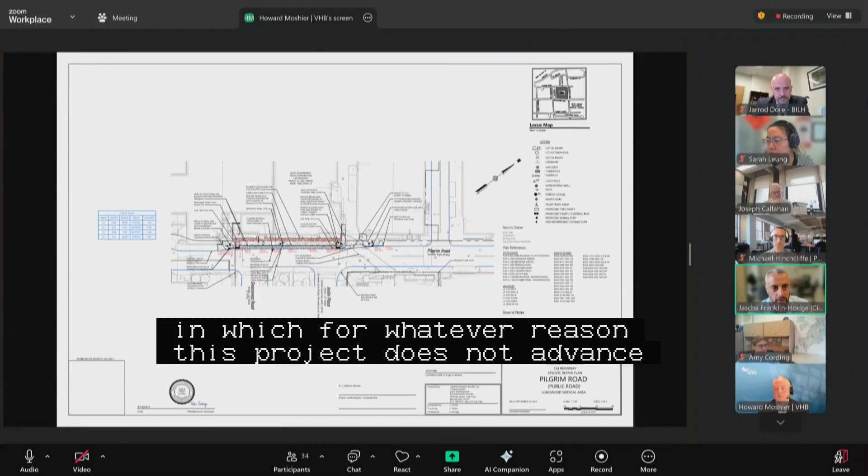I think the only thing I want to make sure we have a plan for is a scenario in which, for whatever reason, this project does not advance as intended, or the rest of the process that's still ongoing results in significant design changes that affect these discontinuances and other actions. I just want to make sure there's clarity about how that would play out.

We don't want to have empty vertical discontinuances hanging out in the city in perpetuity if there's no structure there or no obvious reason for them to continue to be there. So my ask is that you, if that hasn't already been discussed, work with Todd and Chong over the next two weeks to figure out how that will be dealt with.

Yeah, and we can certainly report on that at the public hearing. That would be great.

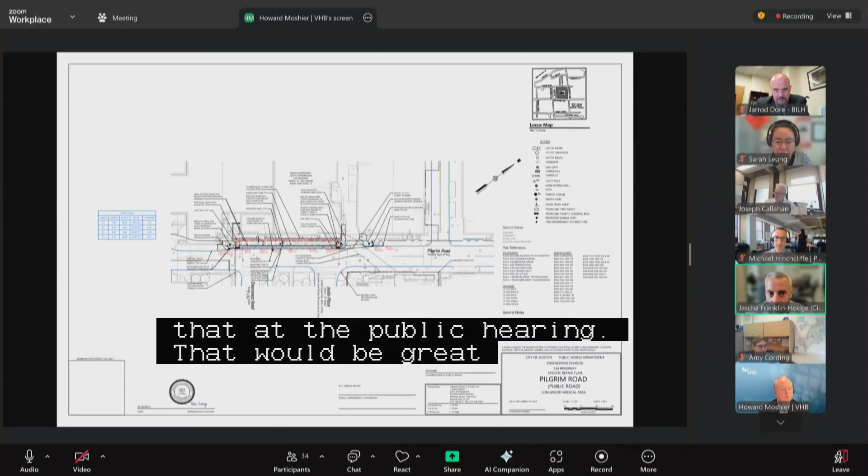Commissioners, other questions, comments? All right, hearing none. PIC staff or members of the public? Oh, actually, before I move on, I did have one other thing I wanted to confirm.

On Pilgrim Road, where the connector sits above the sidewalk, you'll be removing several city streetlights, or at least one city streetlight. I wanted to confirm, I think I saw one of the renderings with a nighttime view that showed illumination of that sidewalk on the underside of the structure overhanging the sidewalk. I wanted to confirm that the proponents will be providing lighting for that sidewalk area, and that you will have incorporated in your LMI responsibilities for maintaining adequate and safe lighting levels.

Fair summary, and to further the discussion, we have consulted numerous times with the street lighting department about existing and future streetlights in this area, and we will continue to do so. Thank you. We'll make sure that's in the LMI.

Okay, excellent. All right, PIC staff, members of the public? I don't see any raised hands right now.

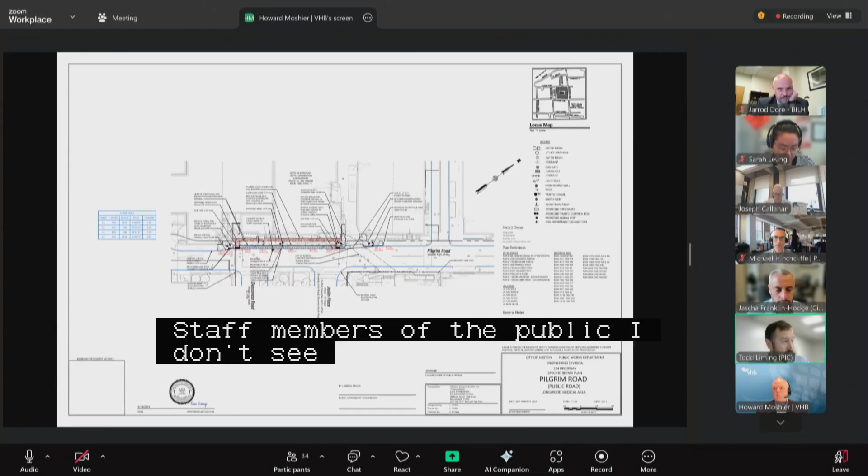Howard, would you mind just touching on the appraisal? I just want to report for the record that the appraisal that was generated based on the discontinuances that you've seen to date was shared with PIC staff earlier today. So that's available for review by staff and the city.

Yep, confirmed on that. Thanks, Howard. Thank you, Todd. All right, hearing no other comments or questions, will you guys be ready for your public hearing in two weeks on October 9th? We will, thank you. Wonderful, all right, thank you so much. We will see you back here in a couple weeks. Thank you for your time.

All right, moving on to our next agenda item, new business 2, 4200 Washington Street, Basile Street, Roslindale, pedestrian easement, specific repair plan, a set of petitions by 4200 Washington LLC. Would the proponents please introduce themselves, their affiliations, and walk us through the proposed actions here?

Thank you. Again, Tim Hayes from Bohler Engineering, civil engineer on the project. I'm joined today by Janae Hole from the owner applicant group, 4200 Washington LLC. I will go through a brief overview of the project and a couple actions that we have in front of you.

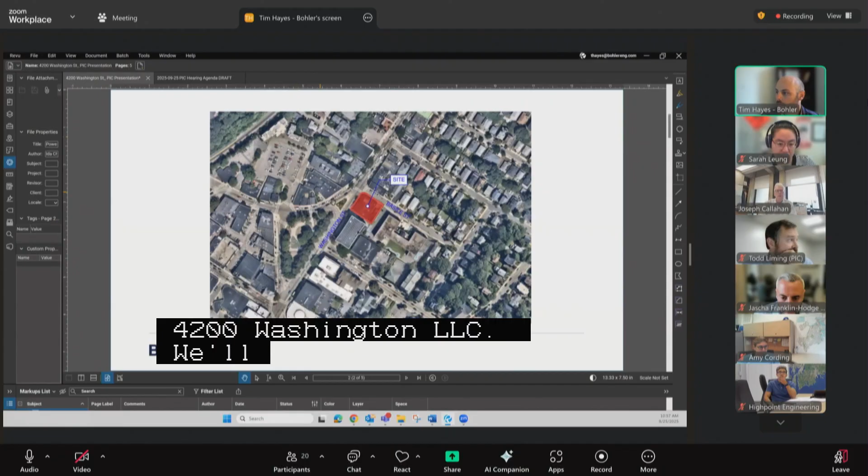The site is located at the corner of Washington Street and Basile Street in West Roxbury. It fills the entire block there. Today there's an existing building that will be demolished for a 5-story mixed-use building that will have ground floor retail, potential restaurants, as well as community theater. Above that is 31 affordable residential units.

In front of you today we have two actions, which are specific repairs on both Washington Street and Basile Street, as well as associated pedestrian easements, as shown in red here, on both streets, Washington Street and Basile Street.

As far as the streetscape itself, we have worked with the various departments to incorporate the existing street trees on Washington Street, as well as expand a permeable unit paver band in front of the sidewalk here. Beyond that, on this private site, we have a set of courtyard and deck for access to the restaurant and retail spaces. And then turning the corner, we have new concrete sidewalks, curbing, and a larger pedestrian area where the building steps back.

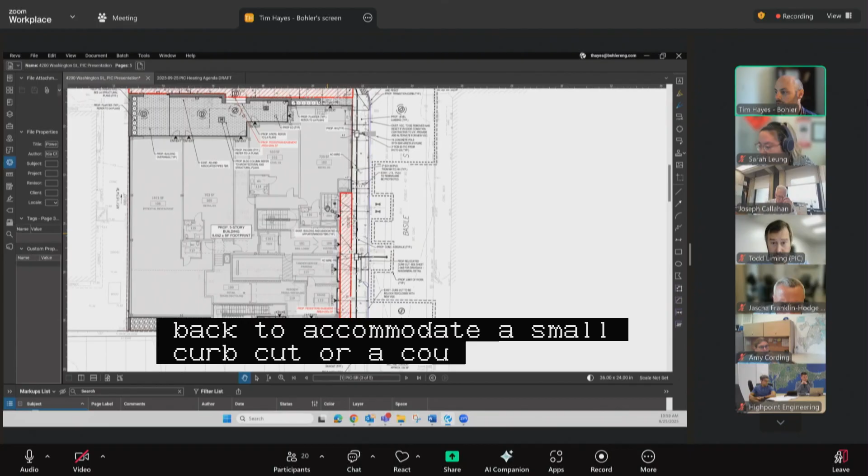This is to accommodate a small curb cut for a couple parking spaces, tandem service parking inside the building. It's a 10-foot wide curb cut, very, very minimal. I know we've been working with disabilities on that.

We're going to be looking at reconstructing the reciprocal ramps on both the corner of Basile and Washington, as well as the ramp across on South Street, which appear to be not quite meeting PROWAG standards. So we're working with Sarah on that.

And in addition, we've been working with lighting. One, there's a light pole that was actually knocked down in a recent accident over the last year. That lighting is going to be replaced in kind, and then we're going to add a new light pole around the corner with new conduits from the handhole on Washington Street, new handhole, new light pole, new base, and stubbing out conduits in two directions of directional lighting in order to provide future connections for those folks.

I should explain there's bike parking out on Washington Street within the furnishing zone that has been designed in accordance with the city's bike parking standards and dimensions. We have enough space for a full-width concrete sidewalk behind that and the ability for pedestrians to navigate around the corner.

Open to any questions or comments from the commission. Commissioners, questions, comments?

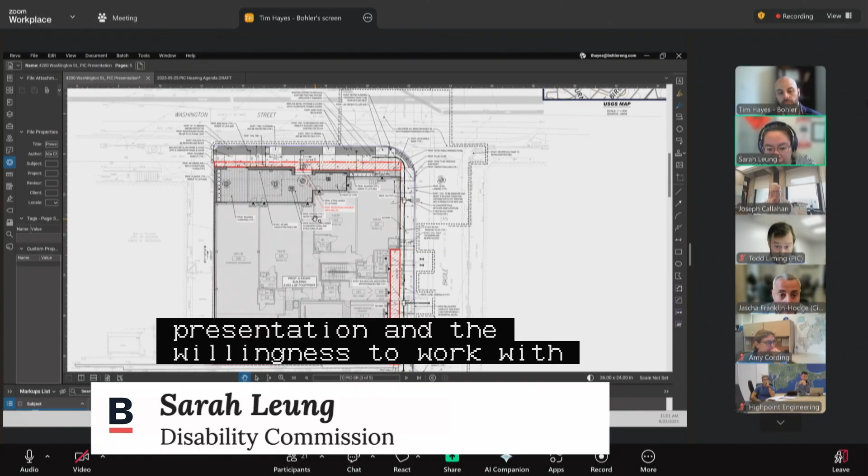I want to thank the project team for the presentation and the willingness to work with both myself and Dolores on some of the ramps. It was flagged that there is a pinch point of 4 feet 7 inches, or 4 feet 8 inches, at the new light pole. I'm wondering if there's any wiggle room to get those few additional inches just to ensure that a 5-foot path of travel is provided along the building side.

We can take a look at it. I know through the BPDA process this building was set between the property lines, on a 0 lot line, so I don't know if we can get a couple inches or not. I'll have to explore that with the project team. We did try to maximize as much as we could, given the minimum distance required per the light poles' lighting requirements. Whatever we can do to get a few more inches there, just so it meets our standards, would be appreciated, whether it comes from the building or the pole side.

Commissioners, other questions? I'll just say I appreciate you working so closely with street lighting to improve the lighting around the project site, and also, while reconstructing sidewalks, to put in place some infrastructure that may have future value along the street.

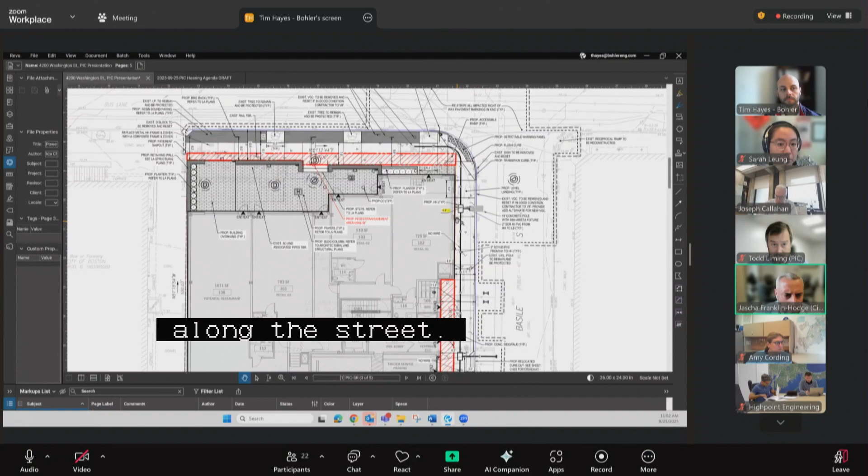One non-lighting related question, just on the Washington Street sidewalk frontage and the furnishing zone. You mentioned unit pavers. I'm seeing in the plan set that this is a resin-bound paving that will be in the furnishing zone between the tree pits. Is that correct?

Yeah, I think that label might be in the wrong place. The resin-bound paving is within the tree pits. We've been talking to the various departments on that component, and the permeable pavers should be in between. I think we have a bad call-out there potentially. So the spacing in between the pits will be the permeable pavers, and the resin-bound will be used just for the tree pits themselves.

Thanks for pointing that out, we'll clean that up on the drawing. I think it's just a bad call-out. Got it, perfect, appreciate that. Well, that answers the question I was going to ask. All right, that's all that I had.

PIC staff or members of the public? I will mention that the project has been in touch with the Roslindale Business Group, and they're expected to coordinate construction schedules, et cetera, with Dennis Kirkpatrick.

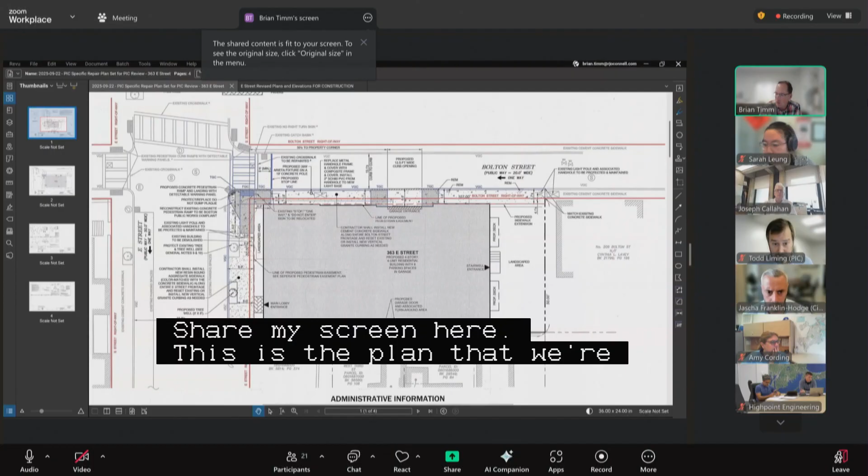Wonderful, let me share my screen. This is the plan we're proposing. There was a demolition of an existing building on the corner of Bolton and East Streets, and we're proposing to build a 4-story, 4-unit residential building with interior parking spaces, 8 of them in an inside garage, accessed off of Bolton Street, which is a one-way street.

Bolton Street currently is a very narrow street in South Boston, measuring 20 feet wide, with significantly less pavement width, 13 feet wide, and a very narrow sidewalk.

As part of this proposal, we are proposing to close a 30-foot wide existing curb cut on Bolton Street and replacing it with a 12.5-foot wide curb cut to access the new garage.

And we will be increasing the sidewalk from currently maybe 3-4 feet wide at the most. We're going to be providing a 5.5-foot wide sidewalk along Bolton Street.

In addition, along E Street, we will be adding a new tree well to the front of the frontage, and we will be expanding that sidewalk to be 5 feet wide from the back of the existing tree well to the back of the existing new sidewalk in front of the building.

As part of the process, we will also be improving the ADA access at the crosswalk at the intersection of Bolton and East Streets with a new ADA compliant ramp, detectable warning strip, so that pedestrians can safely cross Bolton Street.

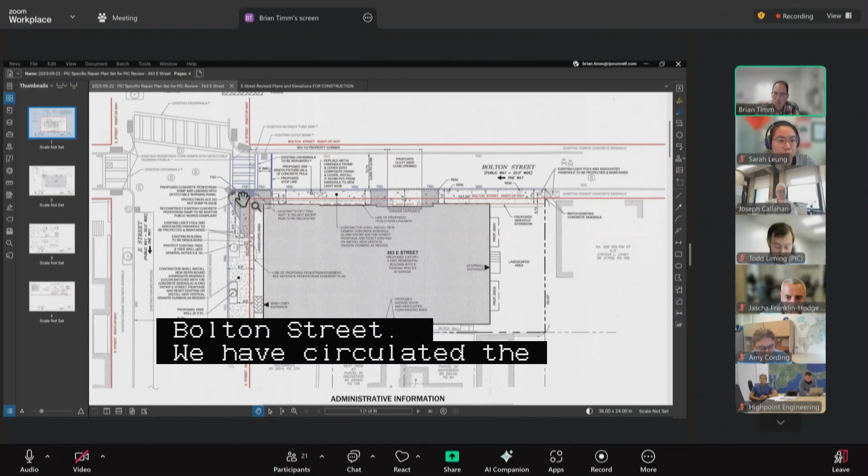We have circulated the application to the various municipal departments, utility providers, received some comments from different municipal departments and have addressed those to the best of our ability at this time. Other than that, I think I covered most of the application. I'll turn it over to anybody for questions.

Commissioners, questions? I want to thank the team for their presentation and want to confirm with them as well that they've been in touch with Dolores Carbono regarding the reciprocal ramps and whether or not those will require reconstruction.

We have been in touch with Dolores through the process. She just sent an email earlier this week saying she's going to review the latest plans, that we addressed her comments correctly. When you say reciprocal ramps, are you talking about across the street on Bolton Street?

That's correct. We will work with her as best as we possibly can to bring that into compliance to the best of our ability.

I mean, obviously we don't own the property. On the other side, as I zoom in a little closer here, the right of way is very close to the back of the existing curb. And I believe there was a new building that was just constructed on that corner recently that is almost zero lot line, believe it or not, in South Boston.

So we have limited opportunity to try to improve that other side, is what I'm pointing. No, I appreciate your willingness to work with her and our team, but I did want

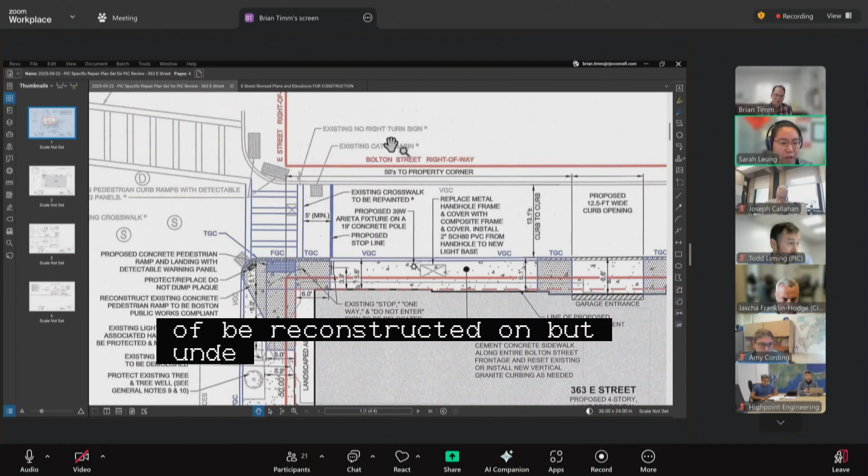to state for the record that once a curb ramp is reconstructed, it is required that the reciprocal ramp be reconstructed, but understanding the constraints, I'm sure you'll be able to work with her team to ensure that we can get the best possible situation.

Yes, we'll do the best we can to improve the situation to the site limitations that are available. Great, thank you so much.

Can I ask that when you come back in 2 weeks that you provide us an update on what you think will be feasible here? Would like to kind of button up the answer to that question as part of this process.

Okay, excellent. As long as, I mean, I'll jump right on it today and tomorrow. Okay, excellent. Understanding that there's a couple of drainage structures very close to this crosswalk, actually possibly in the crosswalk in one case,

one potential thing to explore is the idea of a raised crossing here and whether that could be helpful in solving for some of the ramp issues.

Also, I know that Bolton Street is already a narrow street, but to the extent that there is a minor curb extension or something that could support a compliant ramp, looking at that as well. But we'll leave that to you all to have that conversation and explore the options.

Without a doubt, and you don't see it on here in the detail, but Bolton Street is beyond flat. So we want to be very cognizant of that, putting a raised crossing - I have looked at that and thought of that option as well. Creating a raised crosswalk, while it improves the safety of pedestrians, could also act as a dam on an extremely flat roadway. And I want to make sure that we wouldn't create an unsafe situation in that case as well.

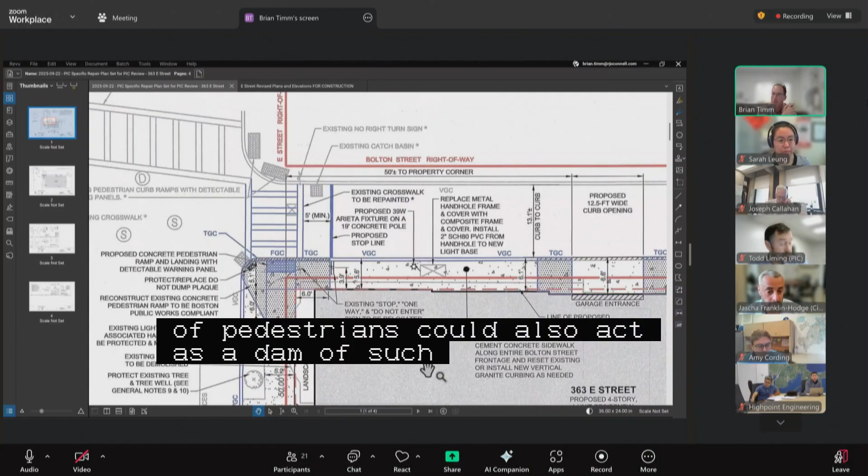Fair enough, fair enough. You do have drainage structures on both sides of the crosswalk, which is correct? Yes, becomes a little too close for comfort. Agreed. So, all right, well, please report back on that when you have a chance to dig in. Commissioners, other questions, comments?

All right, I have one. Can you explain the proposed resin-bound sidewalk along E Street and what is the story there?

That is in response to a comment from the planning department. There's an existing tree in a tree well with a lot of root systems already pushing up through the existing cement concrete sidewalk. Their suggestion was to make the entire sidewalk out of resin-bound aggregate to help the health of that tree and other trees in the future. That change was directly from the comment.

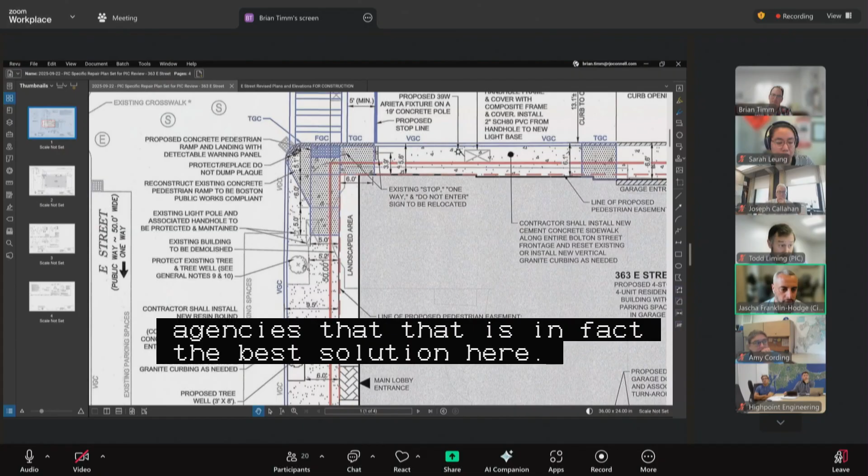Okay, I think if we can look into that one a little bit more. I'll acknowledge the city doesn't always do the best job coordinating all sides of these equations, but I want to make sure there is in fact consensus within the different city agencies that this is the best solution. We do have precedent for resin-bound tree well protection extending across the sidewalk in front of the tree well, but it's atypical to have an entire run of sidewalk done in resin bound this way.

So I think the concern here is a maintenance concern around having a large resin-bound sidewalk that's not something Public Works typically installs, and therefore isn't something we typically maintain. We can fold it into the building's LMI, but that becomes a very non-standard complexity that somebody's going to have to deal with in the future.

So I'm going to ask Todd if you can connect the proponent with OGI and the right folks from our construction management team to talk through the right approaches here, and hopefully we'll find a clear path forward that everyone has consensus around.

Certainly, and I appreciate that. I think we initially proposed just a swath like you described, and then it was a second round of comments that asked for the entire frontage, except for.

Where did that request come from again? I'm trying to go through my emails right now - I shut my email off so I didn't get bothered during the presentation. But I can forward that along, or if you give me 2 minutes, I can probably find it.

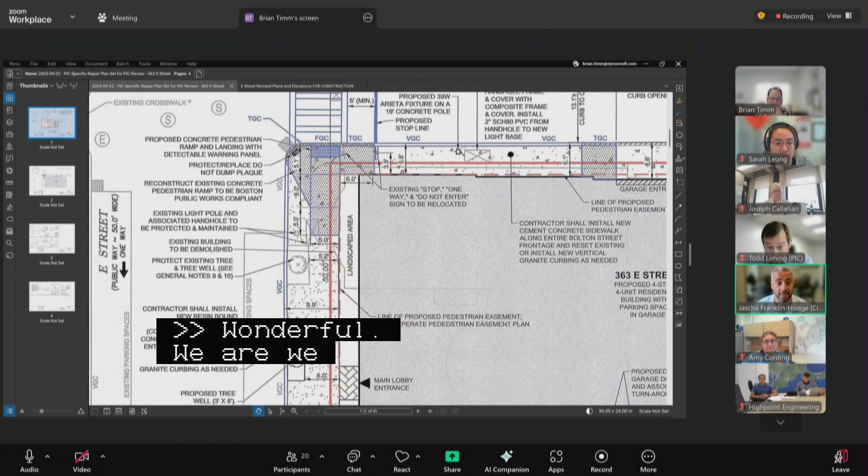We are working on establishing clearer guidelines with broad consensus across all the different city departments about how to handle complex tree sidewalk accessibility situations. So we own the lack of clarity on what to do in a moment like this, but this one caught my eye. Let's handle this as a one-off, and hopefully in future projects we'll offer straightforward guidance for folks to follow.

Sounds wonderful, we appreciate the acknowledgement. That's something we rarely ever hear on the development side from the city, so thank you for saying that.

We're trying to get a permit right now. We have a foundation permit, and basically the project is at a standstill because this is the last outstanding item. So we're trying to expedite this. Hopefully whoever requested it, the planning department, will work with us on trying to come up with a quick resolution so that we can move forward.

Yeah, absolutely, and I will do everything I can to make sure if this doesn't get to a quick resolution that we bring everyone to the table to get you an answer in an expeditious fashion. And Todd, if there are any issues coordinating this conversation, let me know, and I'm happy to knock on some doors and make sure people come to the table to sort this out, so we're not overly delaying the project.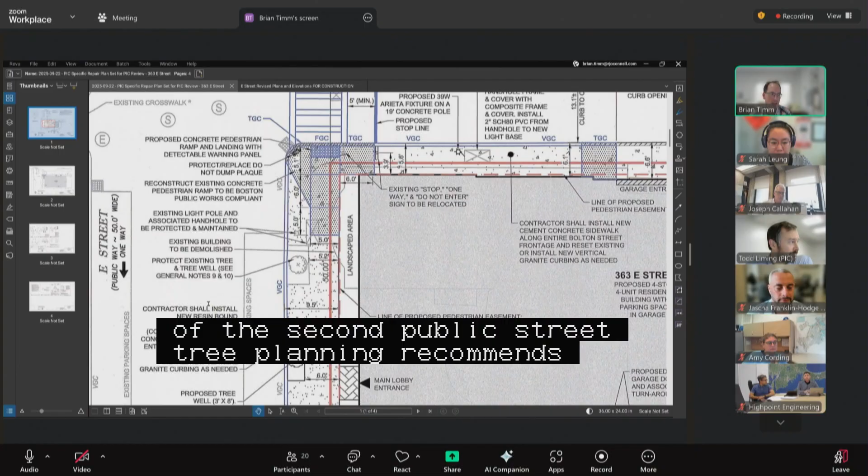And I actually found the email, just so everybody's aware. It came from the planning department, and they requested the resin-bound aggregate color match the concrete sidewalk given the presence of a second public street tree. Planning recommends a single continuous deployment of the resin-bound aggregate for the full length of the East Street sidewalk, with the exception of where the curb ramp occurs. So that's where that, and maybe the misinterpretation, but.

Who in the planning department, just so we can coordinate back with them? So that we're going back to, is it John Stewart Fishbeck? Yep, got it. And I can forward that along if I need to, Amy. Yeah, perfect.

Next slide, please. So to contextualize the site, it comprises 2 lots at 1615 and 1617 Tremont Street, at the corner of Tremont Street and Wigglesworth Street. 1615 Tremont, the lot on the east side of the subject property, has a 3-story, 2-unit multifamily residential building. And 1617, which is directly on the corner of Tremont and Wigglesworth, has a vacant former American Legion post building.

So looking at the street view of the site, we are looking north up Wigglesworth Street from the intersection of Tremont and Wigglesworth. There are — sorry, just to interrupt, if you're showing something, all we are seeing right now is the slide deck, so we're not seeing your map or your street view. Okay, see the street view? Okay, no, we're seeing the opening slide. I think you may be presenting on a different screen than the one that's being shared. We're just seeing the kind of edit view of PowerPoint. I would now hear — there we go. Got it, sorry about that. Okay, no worries.

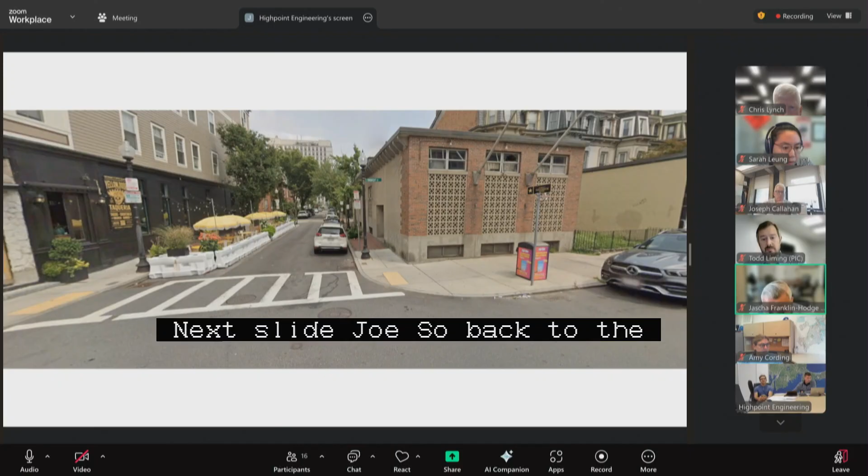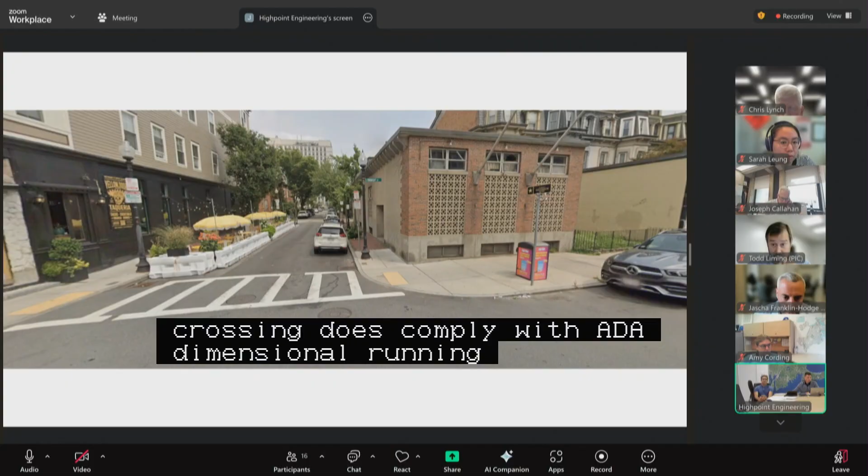Okay, yeah, so we are looking north up Wigglesworth Street. You see that there is curbside parking on Tremont as well as Wigglesworth Street. In non-summer seasons, there is street side parking along the southerly side of Wigglesworth, where you see the temporary outdoor seating there. The crosswalk off the southwest corner of the building was reconstructed a couple of years ago. We confirmed in the field that the curb ramp on the west side of the Wigglesworth crossing does comply with ADA dimensional running and cross slope requirements, so we're not proposing to modify that. We are, among other things, in the specific repairs, going to be reconfiguring the curb ramp on the site side, call it, of that intersection.

Next slide, Joe. So in terms of specific repairs, we're doing a number of things, installing new vertical granite curb along the entirety of the frontage for this new building, which is a 4-story Jewish community center.

We are shifting the curb cut at the shared alley on the north side of the proposed building to align with the new building corner and the existing vertical granite curb to the north of that curb cut, and reconstructing the sidewalks with poured-in-place reinforced concrete.

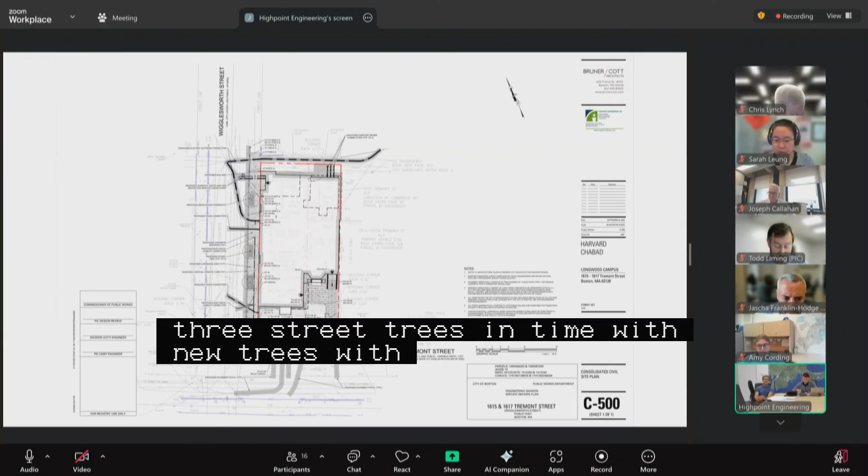We're replacing 3 street trees in kind with new trees with resin-bound aggregate at grade, and also in coordination with the street lighting division are proposing new light poles and handholes with connections in Tremont Street to feed those light power supply lines.

Like I explained, we're reconstructing the curb ramp off the southwest corner of the building at the crosswalk to either side of Wigglesworth, and all building utility and drainage connections are going to be via Wigglesworth Street. We are doing some trenching to discontinue some utility connections for the existing vacant American Legion building and Tremont Street, but not proposing anything new other than the street light power supply duct banks or conduits.

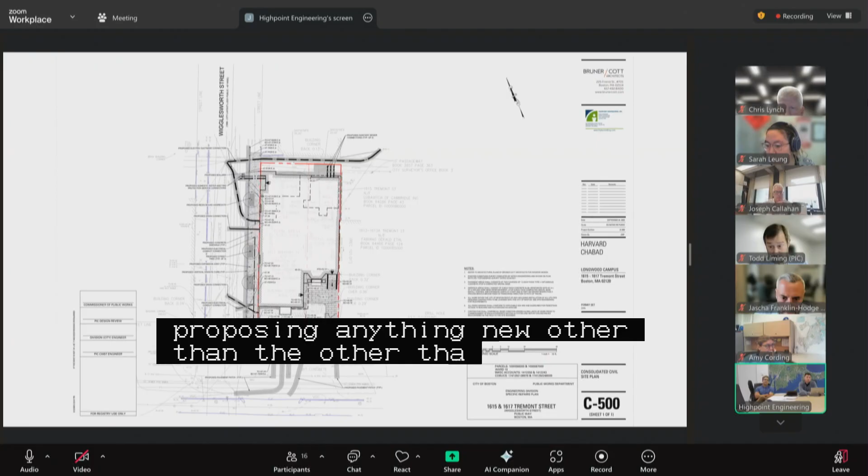Next slide, Joe. So this is a non-annotated view of the landscape plan. Direct your attention to the 3 street trees with the resin-bound aggregate at surface at the tree pits. Next slide.

To support the excavation for the new building, which will include a full basement below grade, as well as a mikveh bath, which is deeper off at the northeast corner of the site, there's going to be a soldier pile and lagging support, which will be about 18 inches in thickness, set 3 inches off of the property line along the south side, west side, north and northeast sides of the proposed building.

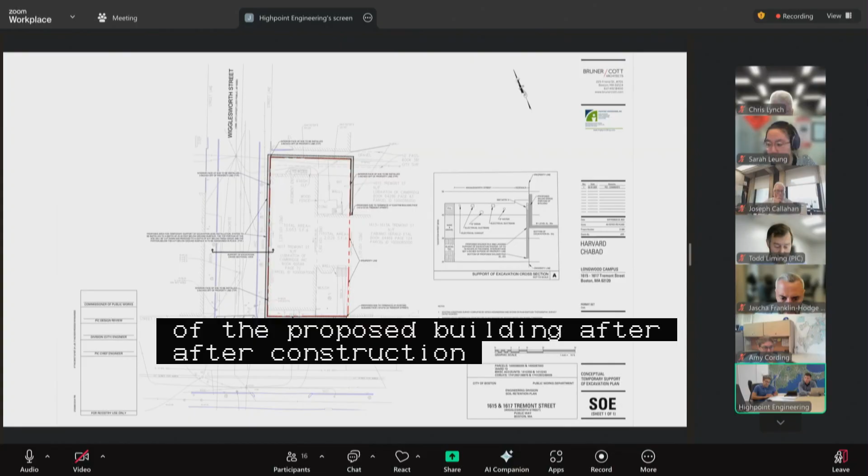After construction of the foundation, the lagging will be left in place, I believe a minimum of 6 feet below grade. And if there are any questions regarding the particulars of the support of excavation, we can do our best to answer those here, considering that Haley and Aldrich is not present. But that essentially concludes the specific repairs and the earth retention license matters associated with this project. So on behalf of the project team, I gladly open it up to the commissioners for comments or questions.

Thank you very much, commissioners. Thank you so much for the presentation. I did have 2 points of clarification.

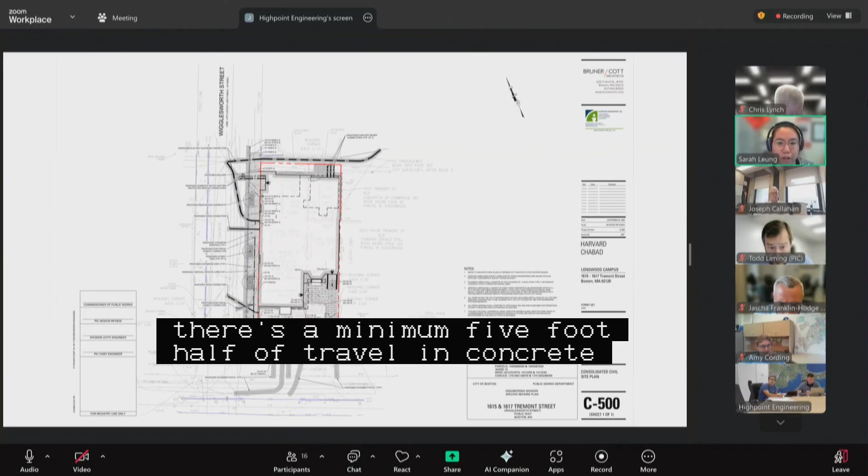For the reciprocal ramp on Wigglesworth, we'd ask you to annotate that on the plan if that reciprocal ramp is indeed compliant, and then additionally place dimensions on the path of travel on Tremont Street - that would be the property line to whatever obstruction there is on the street side of the sidewalk - and as well as Wigglesworth, so that would be building face to tree pit. Just confirming that there's a minimum 5-foot path of travel in concrete demonstrated there, just putting those dimensions on the plan. Okay, great, thank you. Yeah, we can do that.

Commissioners, other questions? A couple from me. Anyone hearing nothing from anyone else? So on Tremont Street, I lost the sheet that I was looking at.

Looking at C200, it references, it looks like - is that a lawn in the front of the building along Tremont Street? That is a turf lawn that will overlie the basement roof slab. So this is essentially a zero setback construction with the building foundation. The basement consumes the entirety of the subject property.

So there will be turf on the private property side above the slab, which will be under drain. Got it, okay. And the plans reference a swing gate. I don't think we have the landscape plan that maybe details that, but just confirming that that is internal, that it will swing into the building and not be possible to obstruct the right of way.

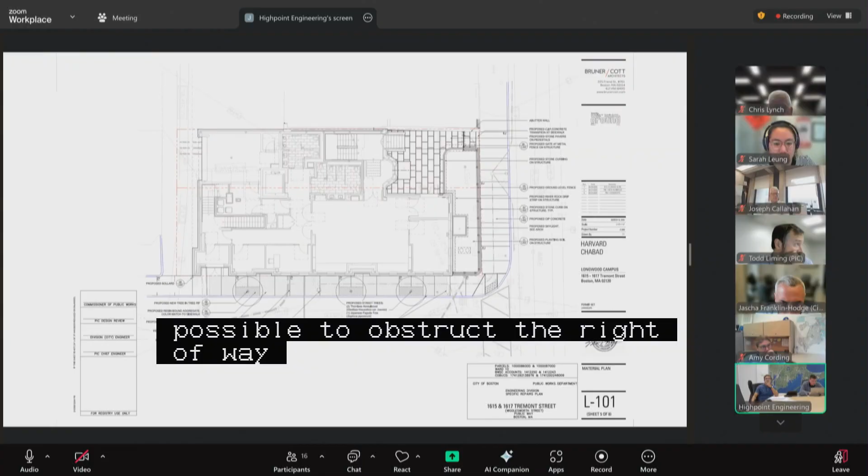It's actually set back into the site, so it swings - you can see it, I don't know if you can see my mouse. Can't, but it's top right on this plan. So it's - oh, I see, it's around the corner. Okay, yeah, got it, I see. It's the arrows refer to the fence and the swing gate together, so it wasn't quite clear to me, but now I'm understanding that, I see how that works.

So, but just to confirm that with that setback, the width of the gate will not allow it to swing into the public right of way. Correct? That's correct, it will not. Okay, can we just make sure that that is noted on the plans? We just want to make sure there's not potential for obstruction of that path of travel. Yes, absolutely, happy to do that. All right, that sounds good.

And then second question, the sidewalk on Wigglesworth Street. So Wigglesworth is currently almost exclusively brick, not in great condition, and we certainly are supportive of creating a minimum 5-foot wide concrete sidewalk. However, my question is whether the furnishing zone could be done using permeable pavers that match the color and some of the character of the brick elsewhere on the street to create a continuous streetscape, and also to help the trees, which have not fared well in their current situation, get more water from that permeable surface.

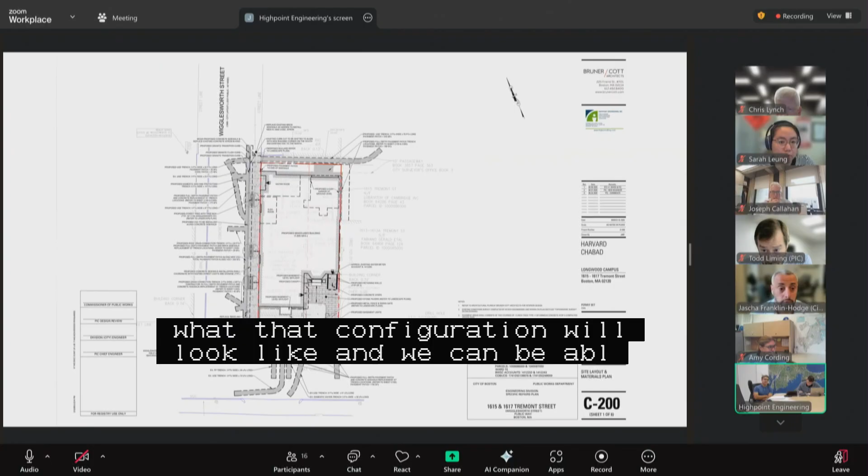Yes, we can coordinate with ground on what that configuration will look like, and we should be able to have that ready in time for the public hearing in 2 weeks. We have standard details for concrete sidewalk next to permeable pavers. That should probably be the starting point, but hopefully we can make that work.

Is that along Tremont and Wigglesworth, or just Wigglesworth, that request? The request was just along Wigglesworth because of the existing brick along the rest of the street. It's just trying to create a nice visual where there's some continuous brick strip that then opens up into the remaining street with its brick sidewalks, and also to support the trees there. There is not brick or trees on Tremont Street, so no need to change what you're doing there.

Okay, I had a second question, if that's okay. To comply with the sizing of the tree planters determined by the city, if that dictates a less than 5-foot dimension to the face of building from tree planter, what do we do? Sarah, do you want to speak to that? Sure. So presumably you do have 5 feet from the tree pit to the building, is that correct? I'm not sure, we have to confirm that. No, we do not. We have 3.8 feet from the building to the resin-bound aggregate that we're proposing in the tree pits.

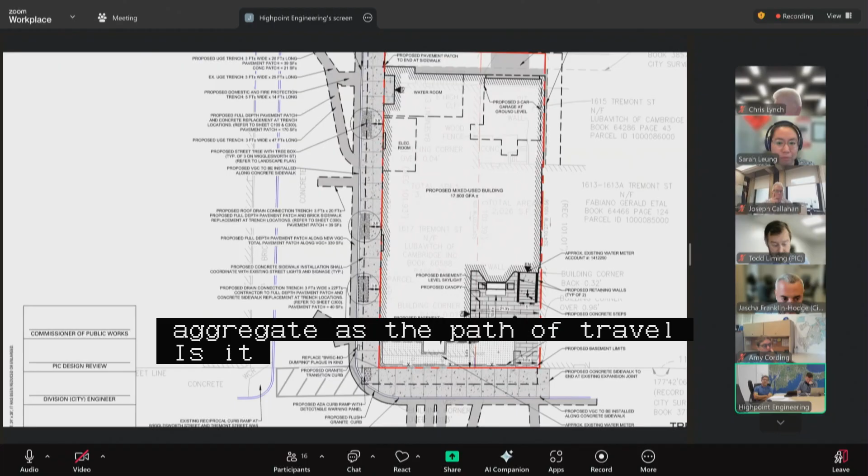So you're using the resin-bound aggregate as a path of travel, is that the intent? That is the intent, gotcha. Yes, with consideration to the tree pit dimensional requirements of the city. Gotcha. So I would confirm with OGI, which is Office of Green Infrastructure, but having a paver strip that kind of meets that 5-foot dimension from back of sidewalk, ensuring there's a 5-foot path of travel between the brick paver strip and the building, would be acceptable to provide for that permeability. So as long as you have that 5-foot path of travel rendered in concrete, anything outward of that can be the paver strip. Does that make sense?

I'm also happy to hop on a call if that's easier as well. No, I believe it makes sense. We'll coordinate with the project team in terms of what exactly it looks like on plan, but we'll reach out to the city with any coordination needs or questions before we memorialize it. Great, we're also happy to review any sketches prior to 2 weeks from now as well.

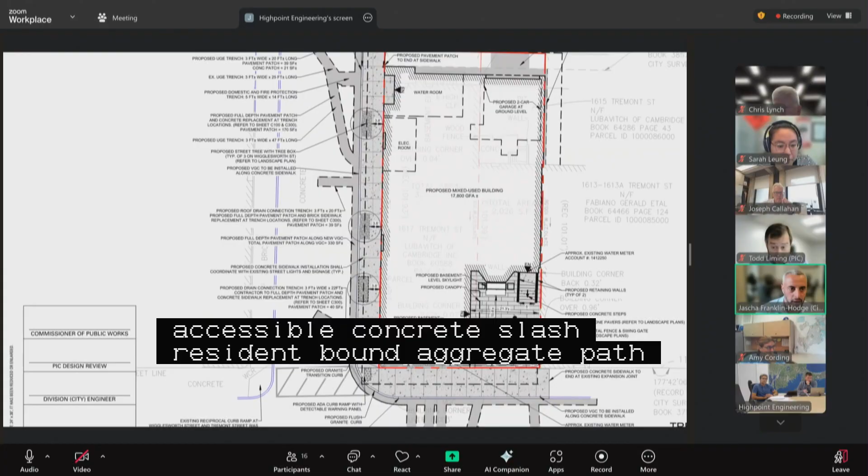Thank you. And just for emphasis, our priority here is the accessibility of this sidewalk. So if we find it's not possible to do a paver strip because of those dimensional needs, then we can certainly let that go. But it would be our preference if we can achieve that 5-foot accessible concrete / resin-bound aggregate path of travel and also have a reasonably sized paver strip. Okay, we understand.

Commissioners, any more questions, comments? I'd say on your plans also, can you make it obvious where the streetlights are and the dimensions between the trees and the lights? Certainly. I was thinking about that as I was talking about it.

One final note for the proponents: I appreciate you doing the bulk of your trenching on Wigglesworth rather than our recently repaved Tremont Street, but it does look like there's going to be some trenching there. That is a guaranteed street because of the recent repaving, so there will likely be higher fees for restoration associated with the cap work you're going to do there. But I appreciate you making the effort to keep it off that street as much as possible.

All right, PIC staff, members of the public? PIC staff has a number of other comments on these current plans and will coordinate those updates with the project team, looking to have the plans perfect in 2 weeks for their public hearing.